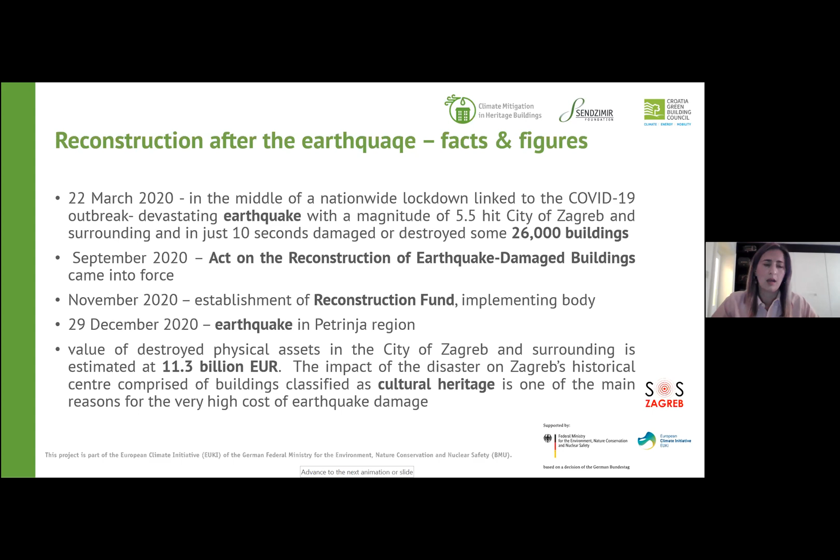Some facts and figures on the process: during this earthquake in Zagreb, about 26,000 buildings were damaged in these 10 seconds. Fresh data collected from the Reconstruction Fund report shows that until the end of August, the Ministry of Physical Planning, the main body, received almost 13,000 applications from citizens for reconstruction or removal of buildings, construction of replacement houses, monetary assistance, or exemptions of payment. Just 2% of these applications were transferred into decisions, which shows us there is a huge bottleneck in the Ministry of Physical Planning and Construction.

Out of these 26,000 damaged buildings, 25% were classified as unusable or temporarily unusable. This labeling is red. They received red and yellow marks, which means the owners are obliged to reconstruct their building. They belong to the Act on Reconstruction and should initiate the reconstruction process. What is very disappointing is that only 35% of owners have officially submitted an application form for reconstruction to the ministry.

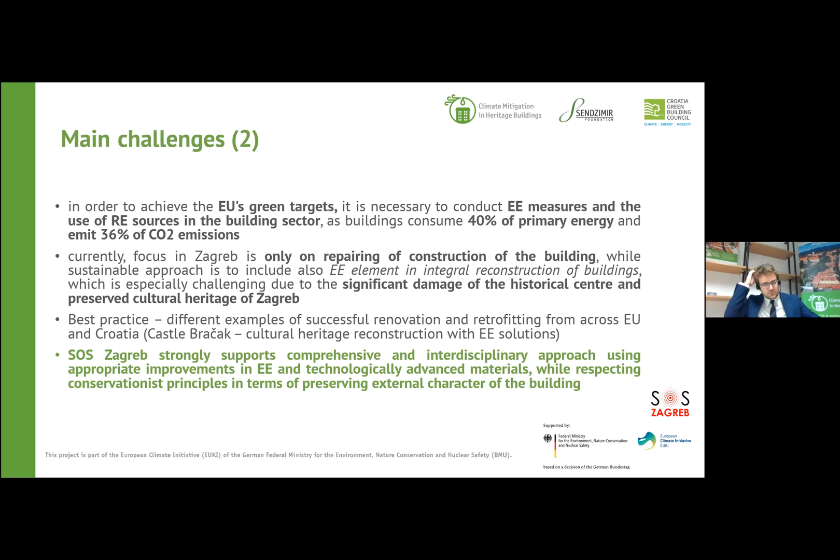Thank you, Ms. Bošnjak, for your very interesting presentation. You introduced us to the SOS Zagreb Association, showed us what your main goals and outcomes are, and thank you for outlining briefly what has happened in Zagreb and Croatia regarding the earthquakes in the last year and a half. As I see in the chat and Q&A, there are no questions at this point, so we will continue with our next presenter, and later on, if there are questions, we'll get back to Iva as well.

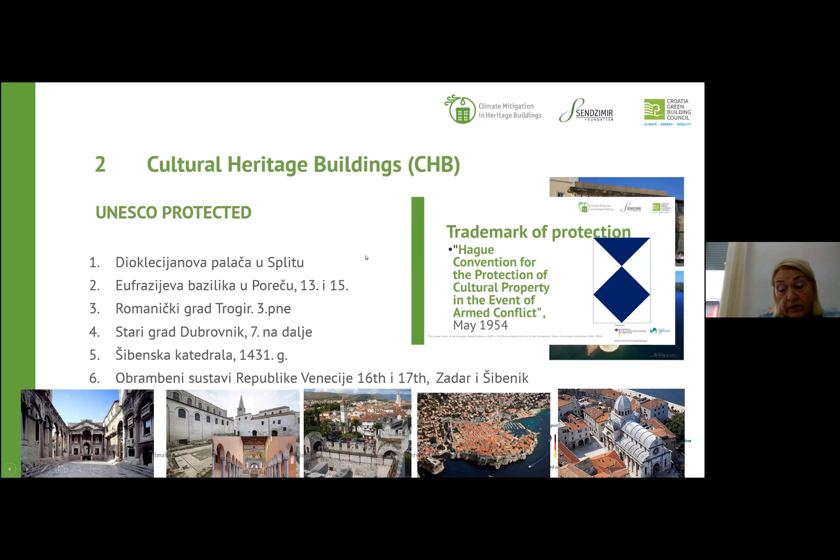Due to the Hague Convention for Protection of Cultural Property in the Event of Armed Conflict in 1954, we established a trademark for protection, but when we put it on our buildings in Croatia, it meant almost nothing during the homeland war in the 1990s, at the end of the last century.

All cultural heritage buildings are built from Neolithic to modern and contemporary art periods, and we can divide them into one which is traditional, built up to the middle of the last century and finished with classicism, and the modern, after that period, starting with the modern era. Neolithic area is antique and Roman area. They start from the islands in the Adriatic Sea.

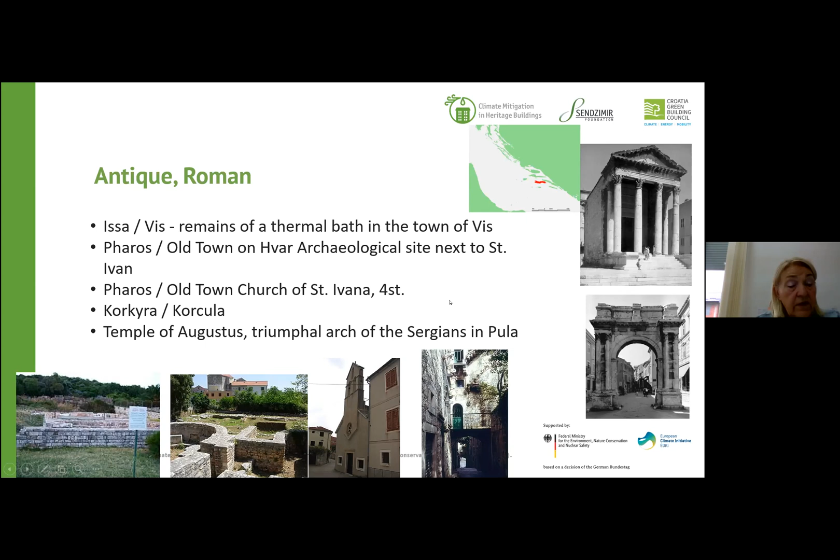On this, we have Hvar, we have Korčula, and others, which are very famous and attractive for tourism, but it is very difficult to preserve them all the time. In the Middle Ages, we have also famous buildings, most of them starting Croatian architecture in that time, and dozens of large churches and hundreds of smaller ones were built.

Then in the Renaissance, we have some churches under UNESCO protection, one in Trogir, and a very famous one in Zadar, the Cathedral of Sveta Stošija. And then we are going on to Šibenik Cathedral, to the Old Town of the Dubrovnik Republic, excuse me.

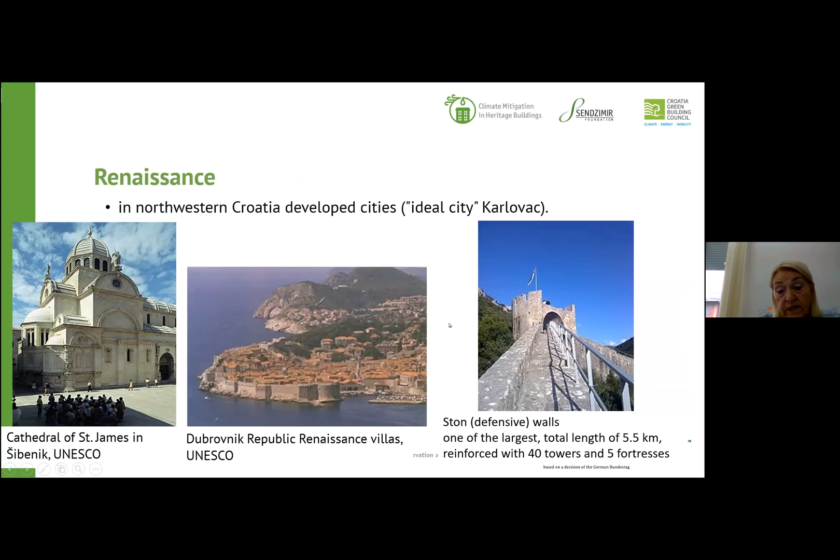And the Ston walls in Ston, which are after China's wall, the second largest one in the world.

From the Neolithic to Moderna in the Gothic period, we have the famous cathedral in Zagreb. It was damaged twice, once in the earthquake of 1880, then in 1906, and now in 2020 it was badly damaged.

From Baroque and Rococo, we have the cathedral in Đakovo, the cathedral in Rijeka, the Baroque church St. Vlaho in Dubrovnik. Then we have the very famous St. Mary Magdalene in Sela, near Sisak. It was badly damaged in this earthquake, the Petrinja earthquake, and it was damaged before in the Homeland War. We repaired it and now it's damaged again.

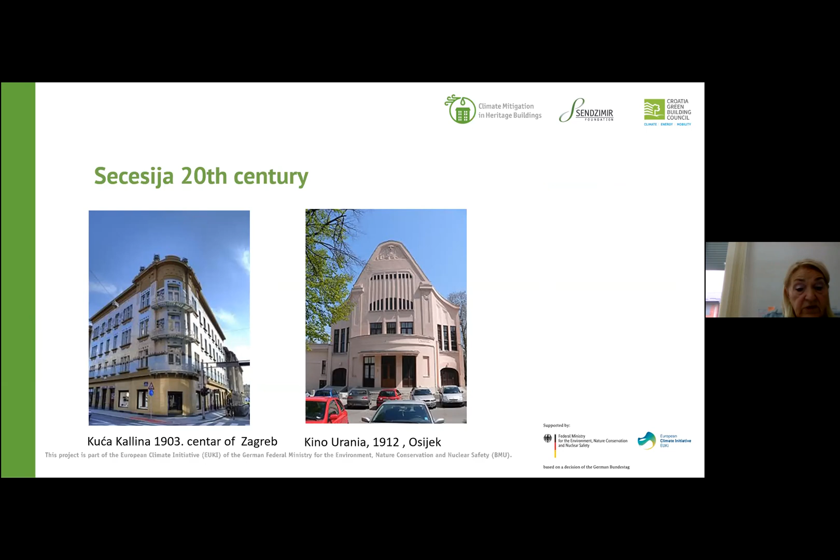For classicism and historicism, we have the Croatian National Theatre, the Academy building in Zagreb, Mirogoj Cemetery, very famous with its arcades, Secesija from the 20th century in Zagreb and Osijek, Moderna in Zagreb, the very famous Croatian fine arts house known as Mestrović Pavilion. It was built in the middle of last century, and the Burza Palace in Zagreb some years earlier.

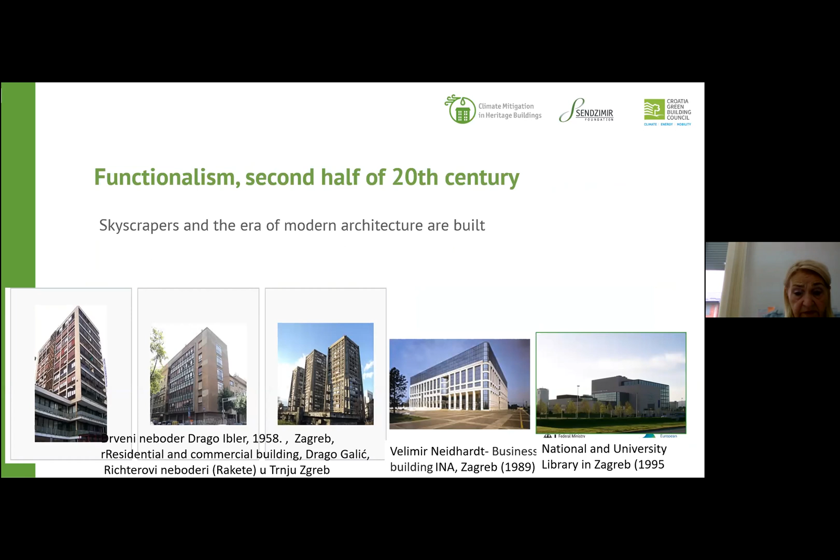Then functionalism in the second half of the century. We have several very famous buildings. As I mentioned before, we have traditional and modern buildings. For our presentation, this one from the traditional period is much more important. This is the different architecture periods, construction and materials, and all are built before 1964, which is the year when we established the first construction regulation in this region in Croatia, in connection with the former Yugoslavia state.

These traditional heritage buildings, as a whole, have different vertical and horizontal resistance, sufficient almost always vertically, but not enough, and very low horizontal resistance for seismic action. We have to know that according to our current regulation connected with Eurocodes, this building has about 4 times less horizontal resistance, and for that reason it is very dangerous, and their behavior and damages in an earthquake are very heavy and important for the building as a whole.

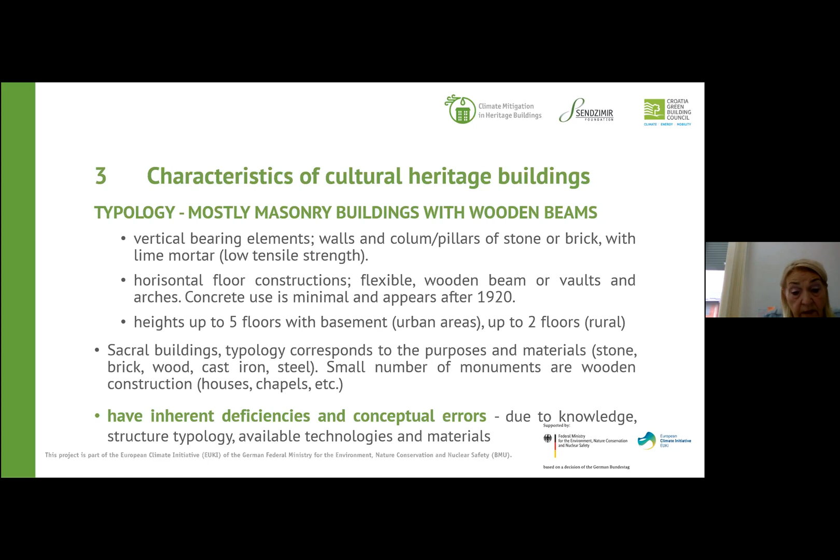All these characteristics lead us to find a large number of inherent deficiencies and conceptual errors in this building. These are connected with low knowledge of the structural typology of that time, of available technologies, and of the materials we use for this structure. Inherent deficiencies are very different.

Inadequate roof construction, poor connections of wooden beams and walls, harmful staircase construction, especially when there is a cantilever style, and deficiency of the foundation and the soil as well.

But over time, acquired deficiencies happened because of old and poor maintenance of the structure of the building, uncontrolled reconstruction connected with walls and floors, upgrades, previous actions, which are sometimes very heavy, especially if an earthquake or fire occurred affecting the building. Then the influence of the atmosphere, of moisture, and undermining of the foundation. This is all very important for understanding and predicting how a building will behave after an earthquake happens.

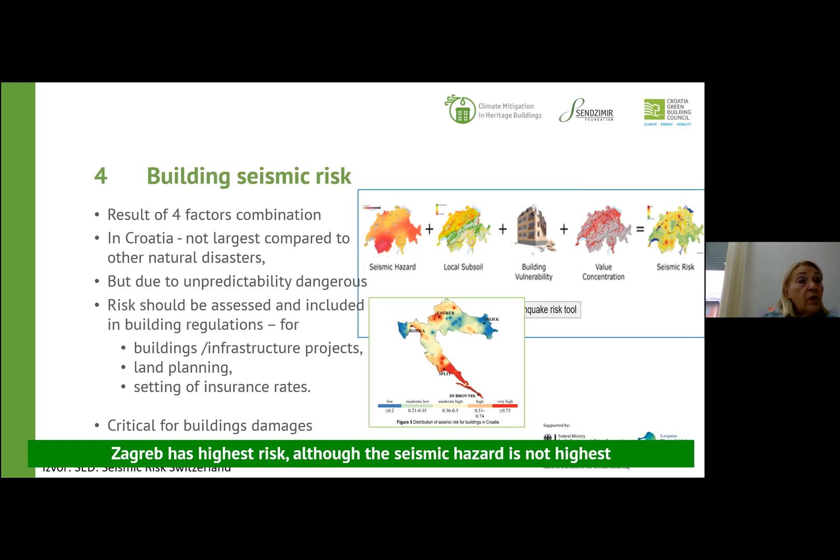Let us give some information about each of these components. Seismic hazard gives us information that the earthquake will occur in a certain area within a certain period and at a certain strength, but we don't know when, and this is the main problem.

We have in Europe the same reason why earthquakes occur. It is a mutual convergence happening between the African plate and the European plate, and particularly in our country, the Adriatic plate.

We have, for the purpose of calculation and for designing new buildings and reconstructing old ones, a seismic hazard map which gives peak ground acceleration information, probability of when it will occur, and a return period of 475 years. This comes from Eurocode 8.

At the same time, this is information for calculating the seismic action and for the response spectrum.

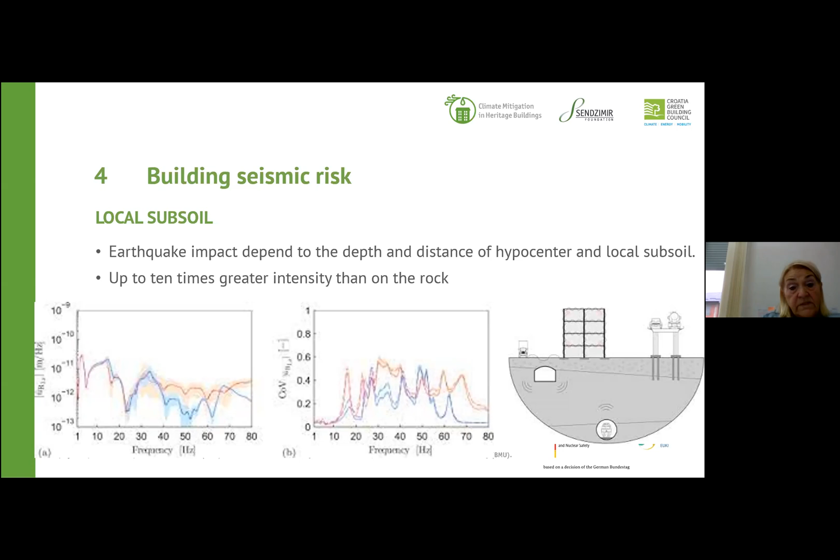Local subsoil is very important because earthquake impact depends on the depth and distance of the hypocenter, as well as on local subsoil. We can have up to 10 times greater intensity on some soil compared with rock. That means buildings have the best behavior if they are built on rock.

Now, something about building vulnerability. All cultural heritage buildings up to the middle of the last century are masonry without reinforced concrete elements, and on those buildings there is a strong influence of damage after an earthquake occurs.

They are highly sensitive to seismic effects, and according to the EMS scale, for that building the vulnerability class is B. This scale goes from A to F, and A is the most vulnerable. That means this class is very close to the highest vulnerability.

Building seismic risk in Croatia, as elsewhere, is connected with the year of construction and the type of construction, and they go almost together. Regarding year of construction, we have information that about 45% of buildings are built up to 1980, meaning without any design for seismic resistance.

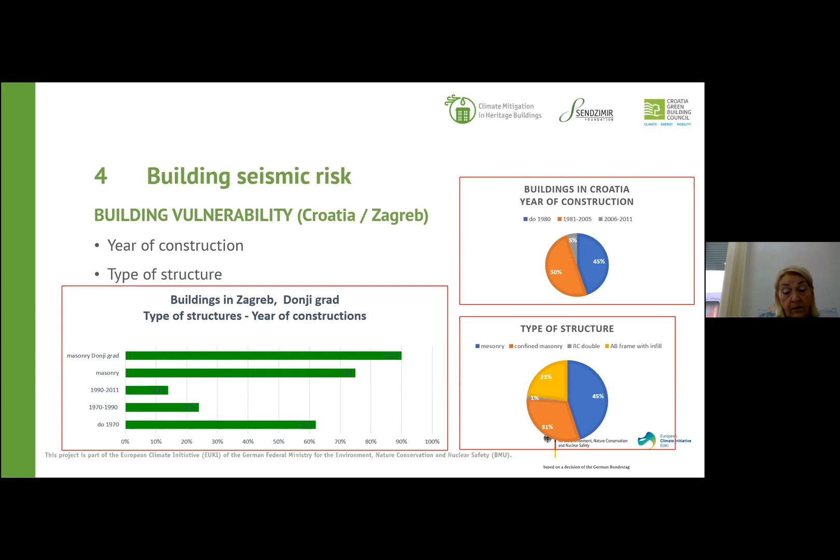Damage on cultural heritage buildings varies greatly. It depends, of course, on the seismic risk of the building. If the seismic risk is low, we will not have any damage, and conversely, if it is high, we will have larger damage to the building.

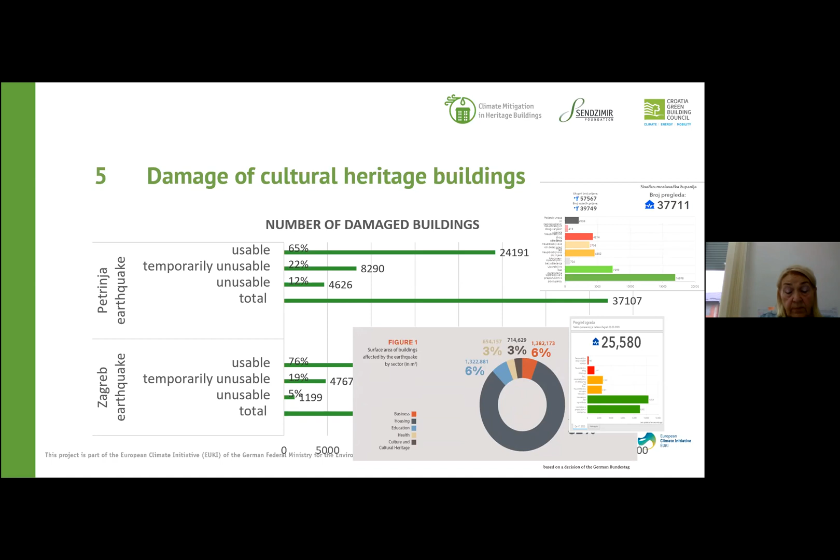When we look at Zagreb, how many buildings under cultural protection were damaged, that was about 3% of all damaged buildings in Zagreb.

Here are two graphs of damage to all buildings, on the left side we have the Zagreb area. You can see how many usable, temporary usable, unusable, and total buildings are assessed. This is the information for Donji Grad, and this is the information for Petrinja.

On the right side you have damage on cultural heritage buildings. In Zagreb, in Zona A, this is about the Donji Grad area, and Zona B is the area of Upper Town, Gornji Grad, and Medveščak. Here you can see individual buildings in Petrinja and the cultural historic whole in Petrinja. Much more buildings were strongly damaged in Petrinja regarding cultural heritage buildings.

Here is information that during the Homeland War, we have about 2,400 cultural monuments destroyed or heavily damaged or with low damage.

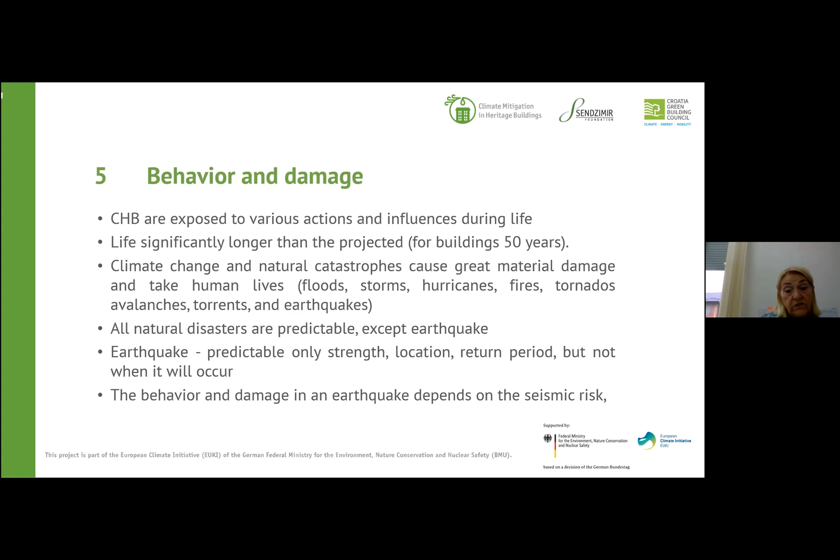The behavior and damages in an earthquake strongly depend on seismic risk. So we have to take care of all the categories which make the seismic risk higher or less important. Damage in all earthquakes, we can see the same pattern in this one.

Influence on chimneys, roof cover, gable walls, or superstructures. They cause a lot of cracks in the connections with walls and horizontal floor structures. They have influence on the bearing walls and others.

They have influence on parapet walls, lintels, around openings. A lot of cracks happen, and on ceiling structures they are falling down. These are not damages on construction, just ceiling damages.

Also we have lots of damage on staircases, especially we found this situation in large buildings like palaces in the Donji Grad in Zagreb.

Then in partition walls, which take a lot of seismic actions during the event and save the bearing walls, that was luck for this situation of behavior and damages.

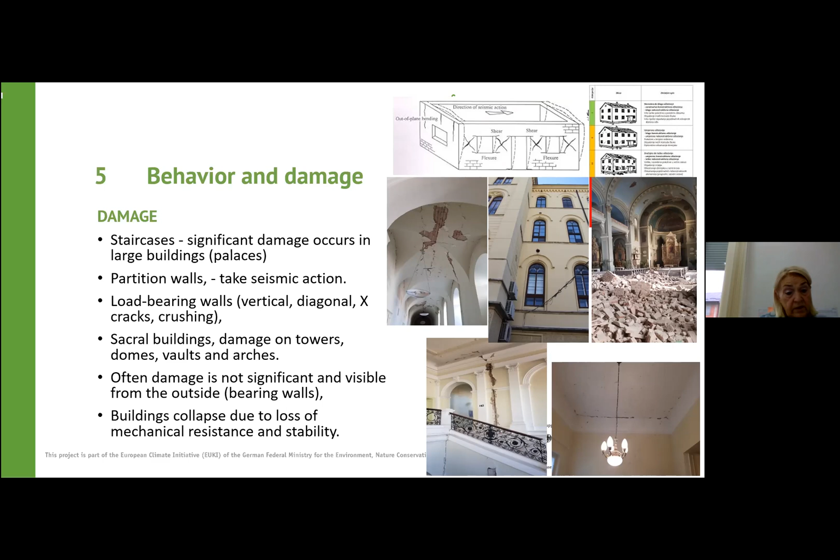But in Zagreb, that was mainly family buildings, small buildings close to the epicenter of the earthquake, and in Petrinja's earthquake that was others too.

What comes after an earthquake happens? We have the phase for repair, renovation, or reconstruction, and generally it goes in three terms: short term, then medium and long term. In the first term we have urgent removal of all damaged elements, such as chimneys, architectural ornaments, and others. This is for protection of the people and the structure after the earthquake.

We also have protection and evacuation of movable cultural goods. In the medium term, this includes recovery, conservation, and restoration, and the long term includes complete recovery to decrease vulnerability of the structure, as well as the architectural and historical value.

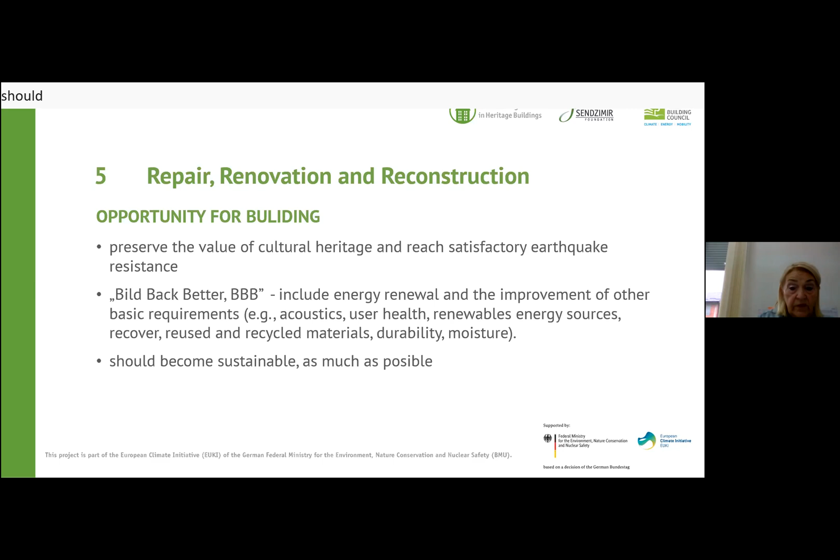In repairing, renovation, and reconstruction, we have a different approach when we talk about an individual single protected building. Then we need to have a conservation study of conditions. We have the document which is the base for all other protection and strengthening.

For the cultural historical whole, we have an easier way of protection, renovation, and reconstruction, according to guidelines which are part of the program of measures adopted in the Reconstruction Act. It may seem that it is not easy to use, but the main reason for that is to make it easier and quicker.

Generally, all cultural heritage buildings, like other buildings, have to be repaired or reconstructed. But for cultural heritage buildings, we can rebuild them as a facsimile, which is not so famous, but sometimes and in some situations it is the only possible way of reparation and reconstruction.

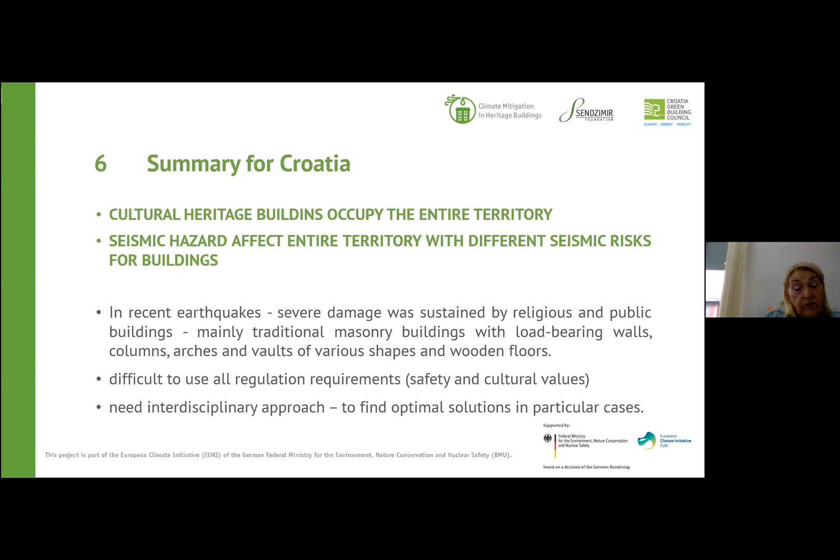Summary for Croatia: cultural heritage buildings all have low earthquake resistance. They are vulnerable, and seismic risk for individual protected cultural property should be determined before an earthquake happens, as well as conservation and restoration requirements.

A strategy should be adopted to strengthen all buildings which are not damaged in earthquakes until now, because we don't want to lose them in a new earthquake.

We have to have in mind that seismic activity is growing as a result of climate change. Additional specialist knowledge is needed, and an interdisciplinary approach to manage all this.

We need to have informal education for all potential experts of various specialties for repairing and reconstruction of damaged buildings after earthquakes. It's important to improve seismic resistance on currently undamaged buildings too.

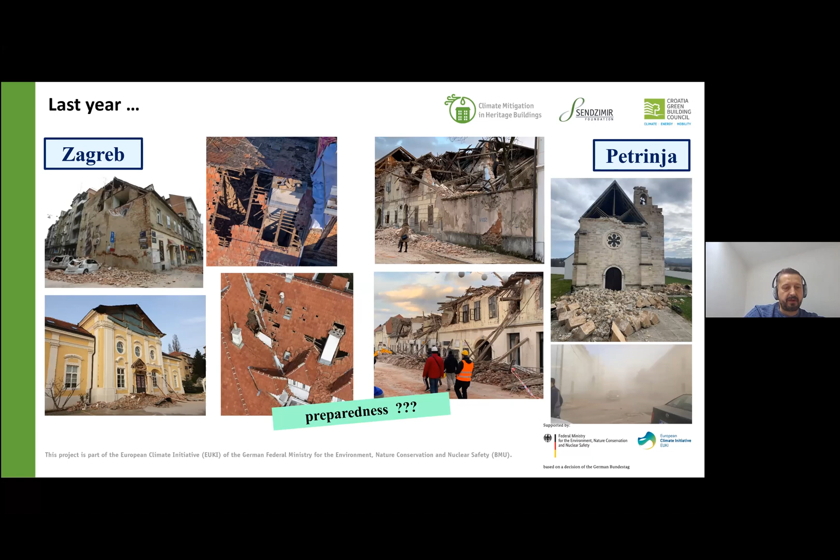But we should know it, because all available data collected in these years are screaming that earthquake is an unacceptable risk for Croatia. Very interesting, because we did 2 national risk assessments with scenario of Zagreb, 2015 and 2018. You can see some results that clearly said that the historical center of Zagreb is endangered, and logically all other historical centers in Croatia.

It is in our mindset to build houses to last forever. We have a very, very aged building stock, like Mihaela previously said, mostly in no code or low code. You can see some data on the slide. Additionally, Croatia is very, very specific with poor maintenance. Most of the region has also massive illegal construction and undocumented reconstruction, like you can see, one of these is on this slide. And in general, seismic risk awareness in Croatia was a serious problem.

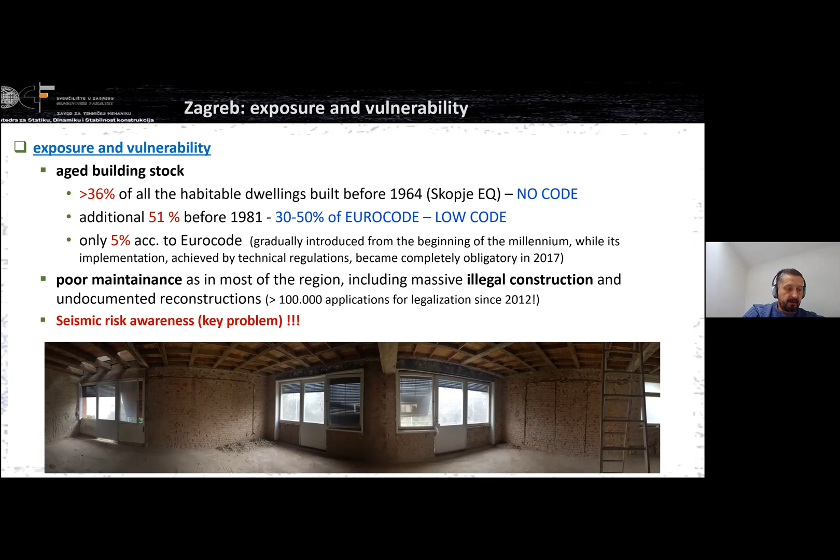I have to highlight that in the reconstruction process in historic city centers, we can expect great discrepancy between what we have on plans, available documentation, or what we find in the real situation. This is related to this illegal construction.

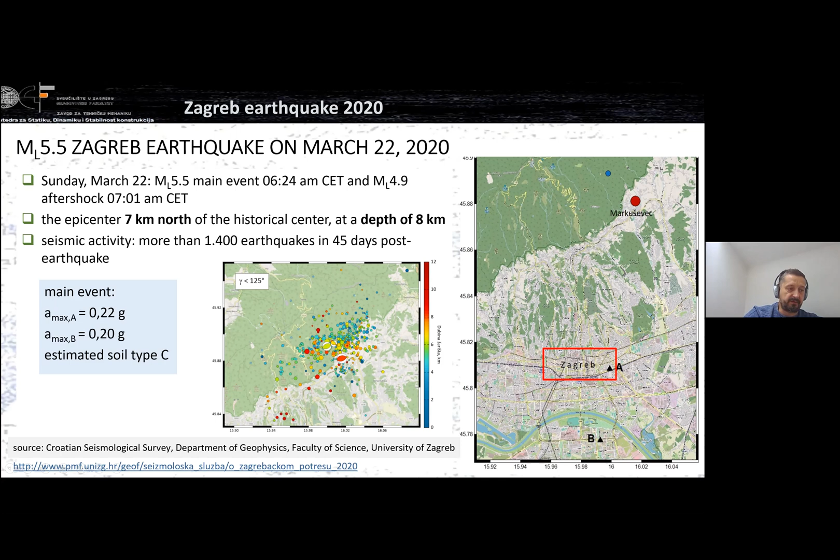And in this situation, Zagreb was struck by a big earthquake. All data you already heard, but I have to mention that the epicenter is really, really close to the city center, what is generally rare. Also, I have to mention that we were very, very lucky, because the day before the earthquake, lockdown was proclaimed, and many people left the city.

And what is strange is that financial losses are far exceeding expectations for an event of that size. I have to mention that we are expecting around 6.5 on the Richter scale, and I don't want to even think about what would happen with an event of that size. Some of the famous pictures, like you saw before, this Zagreb Cathedral.

Many churches are severely damaged. Also hospitals, because most of them are built in the period of the big Zagreb earthquake, 1880. Also many universities are damaged because they are also very, very old. We have a very long tradition from university.

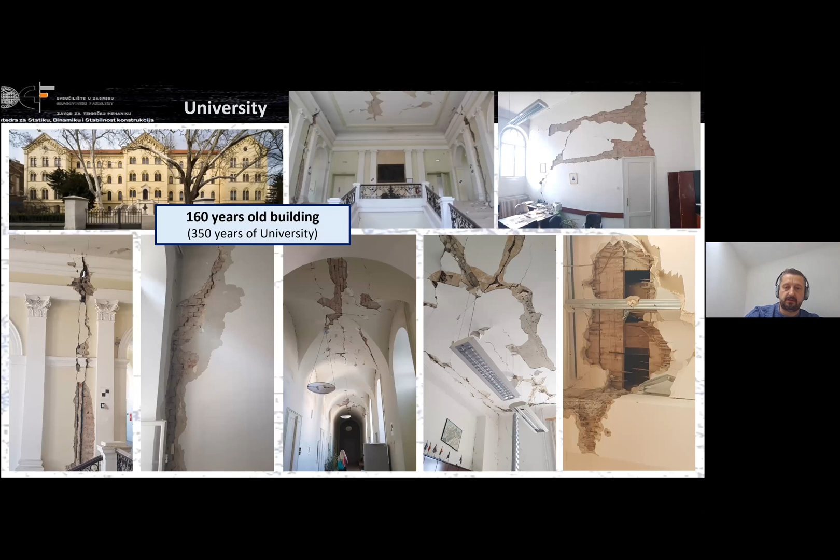The reconstruction of this kind of building usually lasts very, very long in normal times. But nowadays we are trying to push them to reconstruct very quickly by some urgent measures, because we have some funds from the Solidarity Fund.

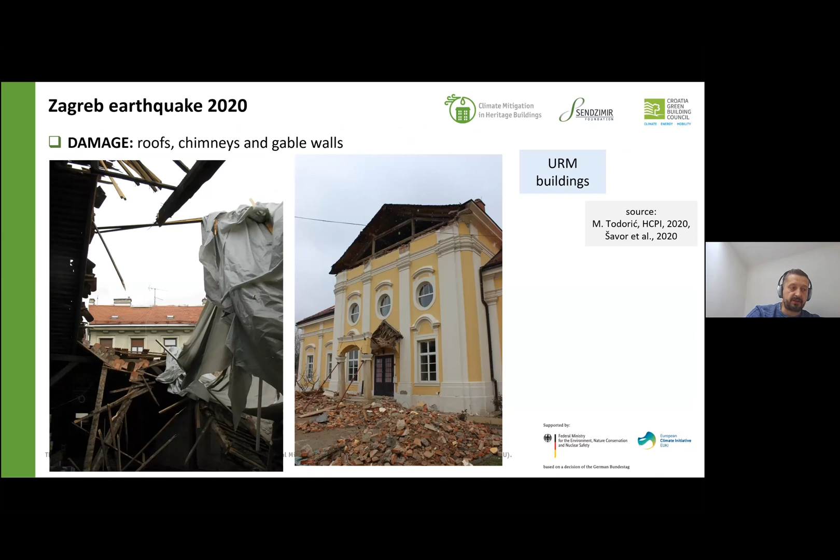In the historical part of the city, this is a usual damage, like Mihaela said: roof, chimneys, and gable walls. We have a serious problem with the wall detaching from the structure and losing stability out of the plane. We are talking here mostly about unreinforced masonry buildings, URM as usually said, and there are some specific problems we have in the historical part of the town.

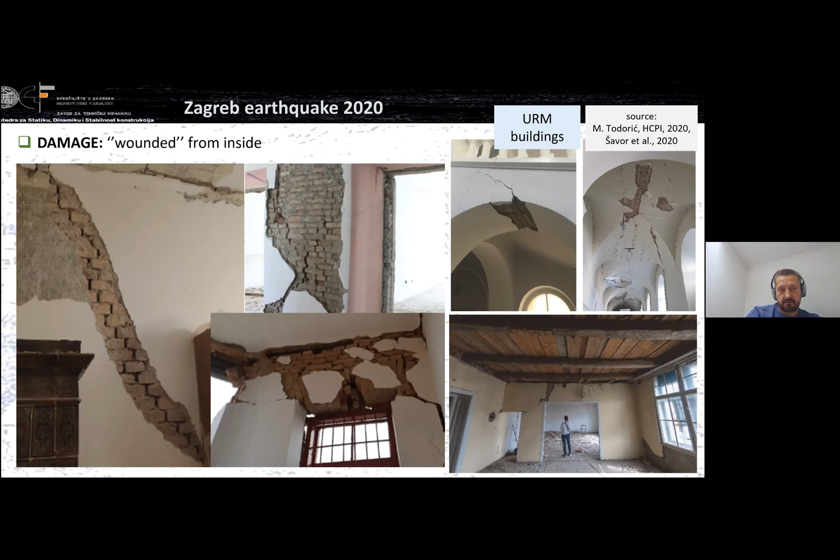Most of the buildings are wounded from inside, and if you walk in Zagreb today, through Zagreb streets, you couldn't see any damage from outside. Maybe some on upper floors, some parts hanging out, but most of the buildings, like I said, are wounded from inside.

Also on the outside of the city, near the epicenter, we had damage to houses. These are mostly illegally made houses.

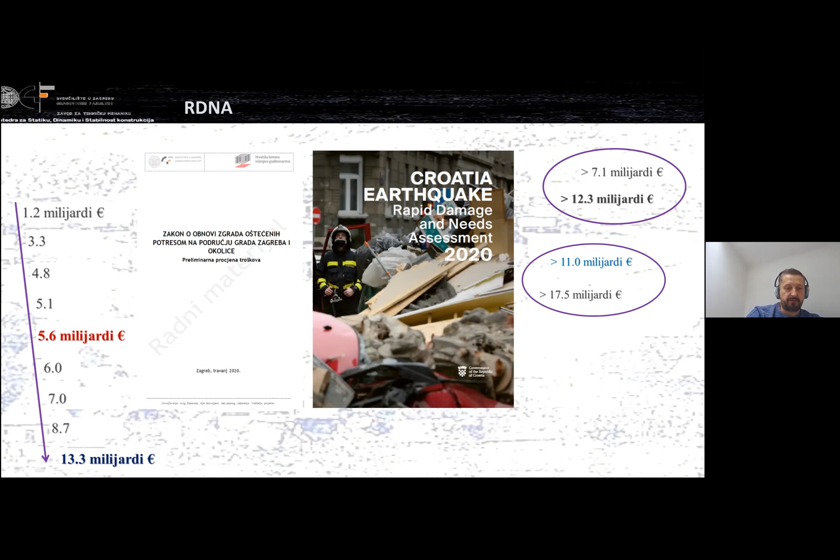In general, like mentioned before, the assessment of reconstruction cost made by our ministry or World Bank - sorry, it's in Croatian - but we are talking about billions of euros. There are some more precise results related to this: cultural heritage hits 1.4 of the general sum. You can see it's a large part of the general sum related to culture and cultural heritage.

We have to mention that only 3% of damaged area is related to cultural heritage, and this shows even more how high our costs are, or investments needed, for the reconstruction of our cultural heritage in Zagreb.

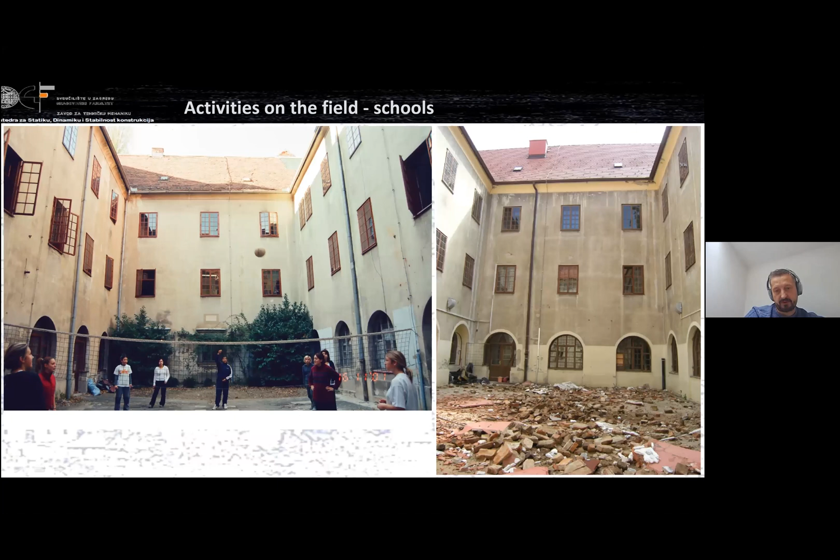Now there's a big discussion about what to do: reconstruct it or move out the school. You can see some plans of that school and photos before and after the earthquake.

Now the building is prepared for reconstruction, and a designer's structural analysis was made to create an invasive reconstruction solution with many reinforced concrete elements, with rigid diaphragms, all storeys.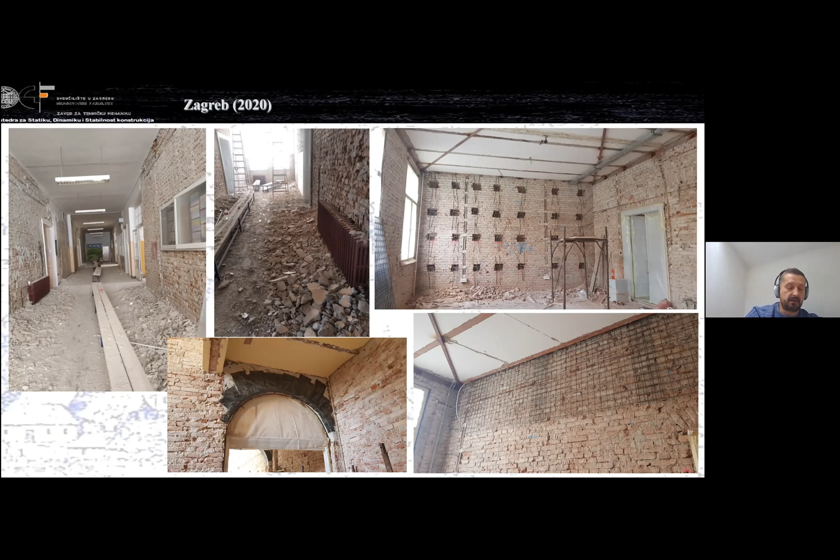This kind of reconstruction caused many parents of the pupils to ask questions about the safety of their children. I raised the question about cultural heritage protection related to schools, maybe hospitals, which are more endangered, and the usability of that building, which is nowadays a huge question in Croatia.

In general, this is data from over 26,000 damage assessments we made in Zagreb. These are some of the results, and the last table shows that over 70% of damaged buildings, usable, unusable, and temporarily unusable, were located in only 4 historical city parts.

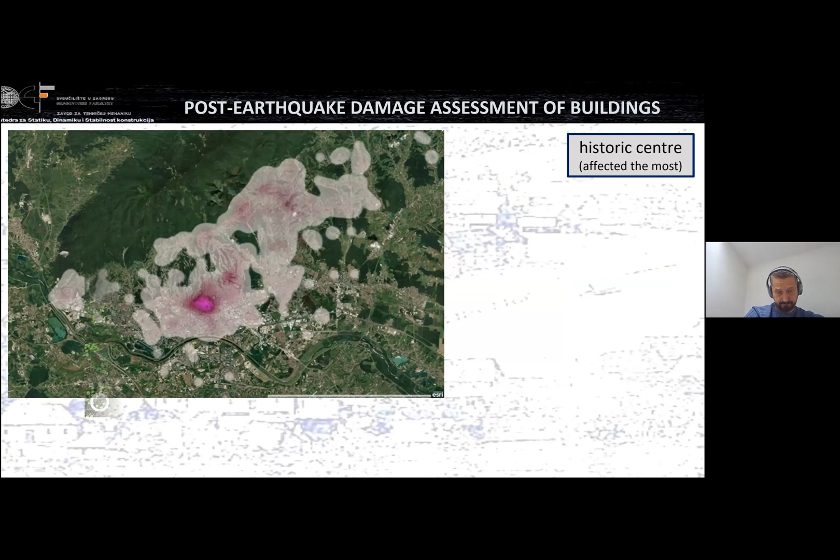We have 17 in total, and this is almost entirely related to the historical center. You can see it here on heat maps of the city. Up here is the epicenter, and this is the old city.

All these results proved the seismic risk analysis I showed at the beginning of my presentation. There's also a map showing protected zones A and B, ambientally protected zones, with the same marks inside: red, yellow, and green.

You can see this city center is really devastated. I have to mention that our old part of the city is arranged in city blocks, or building aggregates, which creates another big problem for us.

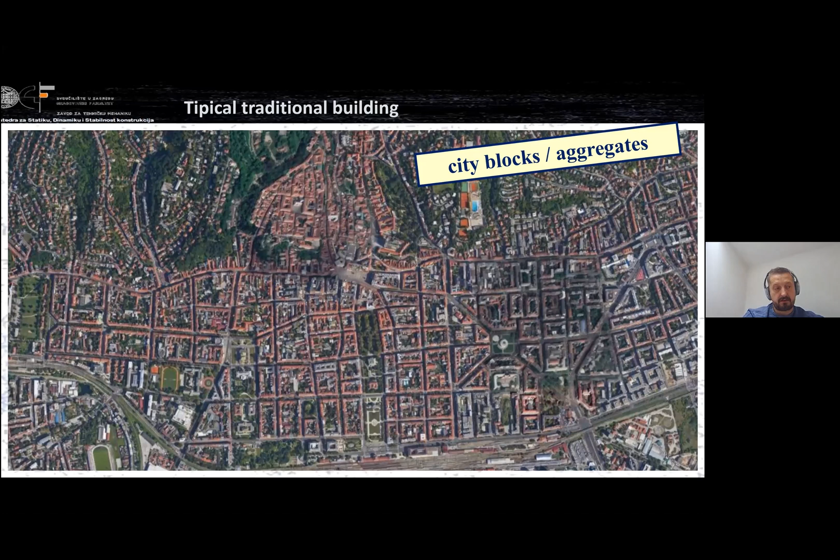We have one huge project about urban renovation, where we gathered over 200 experts from 12 faculties of our university to provide solutions for reconstruction. This is in some sense a pilot project, and there's huge discussion with all these different approaches about how to solve one of the blocks.

It's very hard to reconcile these different perspectives of different experts. We encountered many ownership problems and unrecorded reconstructions, etc. Inside that process, we have colleagues dealing with energy efficiency, green infrastructure, and climate change.

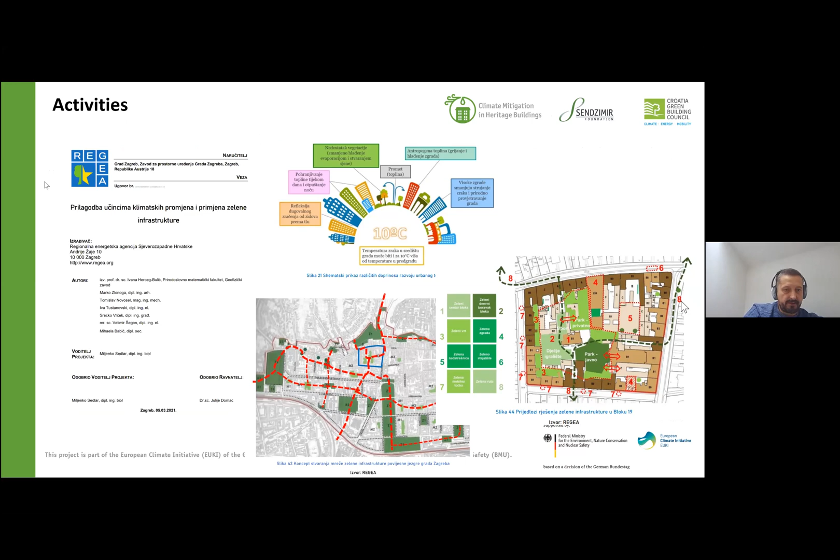This is one of the 12 studies in this Block 19 large study. You can see Block 19 here from the Google perspective, and I have to say this is one of the foundations of the reconstruction process in Zagreb. We try to put all our knowledge inside it and build back better, as a kind of pilot study for all other city blocks in Zagreb.

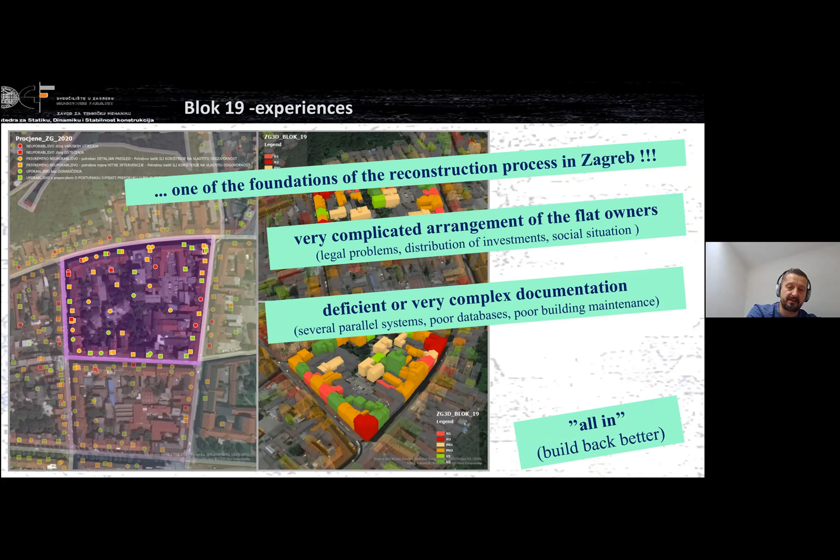I have to mention 2 serious problems: a very complicated arrangement of flat owners, legal distribution of investments, social situation, and very deficient or complex documentation with several parallel systems, poor database, and poor building maintenance. That's one of the problems.

Here is an extract from the proposition of some reconstruction process. It's in Croatian, but I will describe it. We propose 10 different approaches.

The simple one, with intervention only in upper floors, is not really structurally recommended, but it's a simple solution without moving people out. There are several other approaches using old techniques to strengthen the walls, new techniques, old ones, and all of them assume having a rigid or semi-rigid diaphragm on the floors.

The final solution is building replacement. This is proposed to designers and citizens so they can choose and get a perspective on what they can do with their buildings. As I mentioned before, these building aggregates are very complex for structural design, especially regarding the interaction between the buildings.

Results of damage assessment after the earthquake show that buildings are helping each other, and most of the neighboring buildings are different heights. You can see here on this perspective, and that's some of the problems we are dealing with.

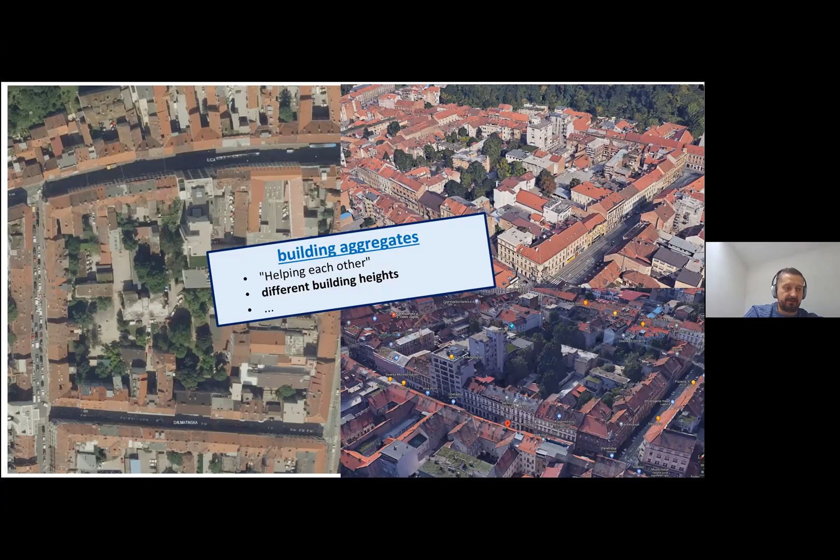I can show one idea to take advantage of these walls in the row and try to reconstruct, or try to synchronize the reconstruction process to do it at the same time as much as can be, and also to use all other elements like stair core or some annexes, upgrades to fix, to make this city block stable in general.

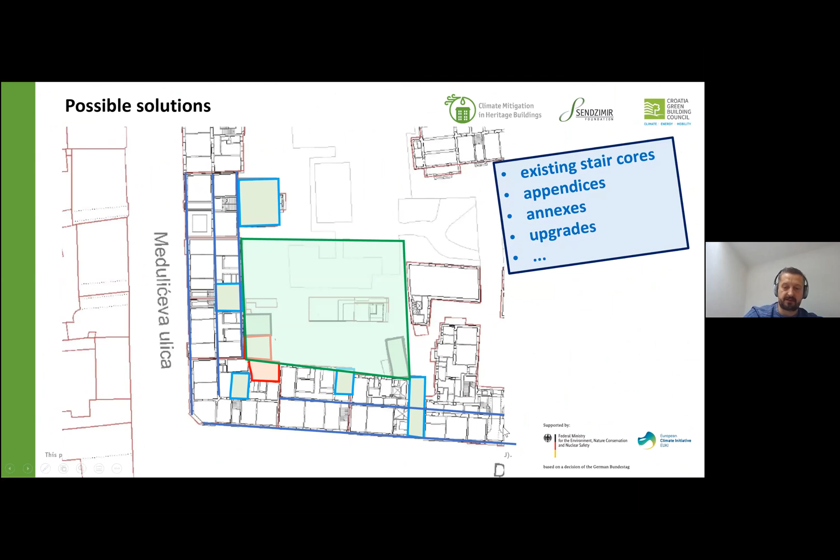Okay, this is one typical building. It's unreinforced masonry, relatively high, 4, sometimes 6 stories, over 20 meters. This was made in this analysis.

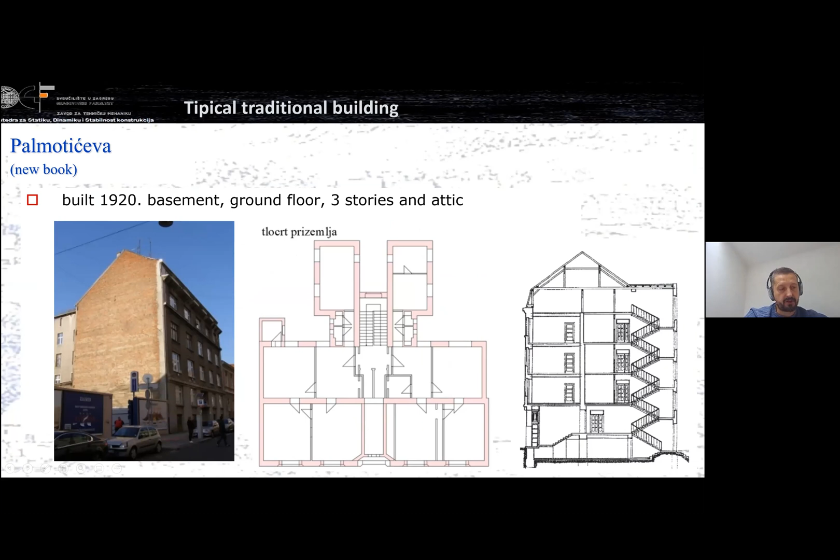In this global analysis, this specific building was made inside the new book presented for our designers. You can see we have facade wall and only one centrally placed wall between, there are supports of wooden beams. Gable walls are usually poorly connected without that weight pressure, and that caused instability.

A second issue is how to strengthen the wall. Calculations show that all traditional buildings are between 20 and 40% of what we can expect to meet our standards, now standards enforced by Eurocode. And many solutions are on the table.

Many new fiber materials, traditional reinforced concrete strengthening is on the table, including insertion of new walls, tie rods, connections, and so on. And this is the big discussion between structural engineers and inside our chamber.

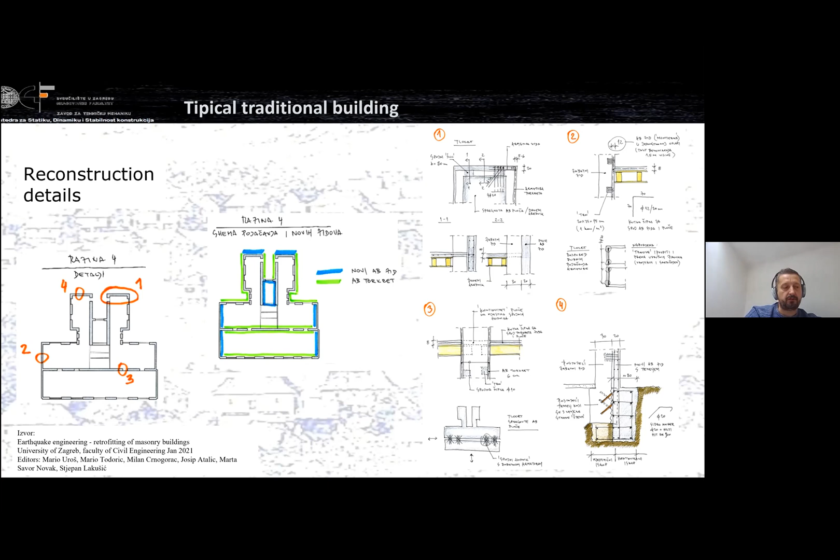I have to mention that one of the serious problems is that non-linear calculations like pushover are not something our engineers are used to, and we had to make some extra effort to raise the level of knowledge before this reconstruction process.

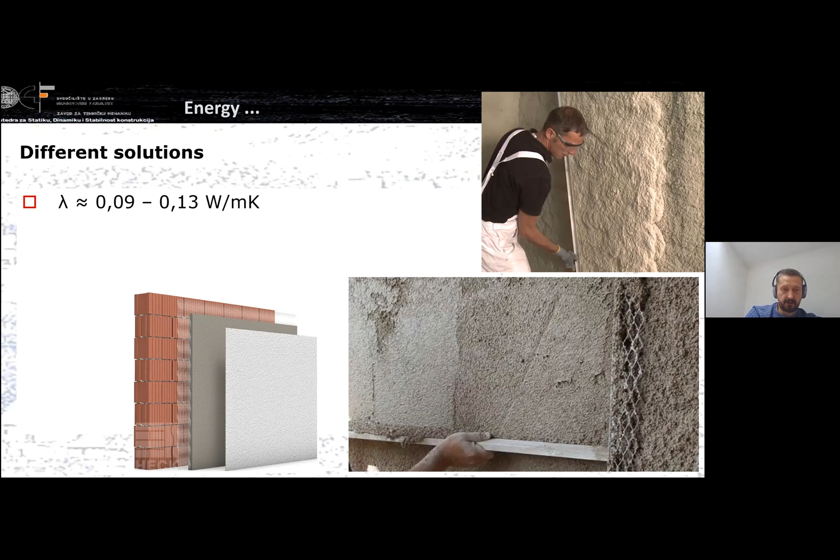I showed this example because in this book all different approaches to the reconstruction process and to the design were mentioned. Also, many solutions related to energy efficiency were proposed, and presented to all the structural engineers and citizens involved in that reconstruction process, to have on the table all possible solutions and choose one.

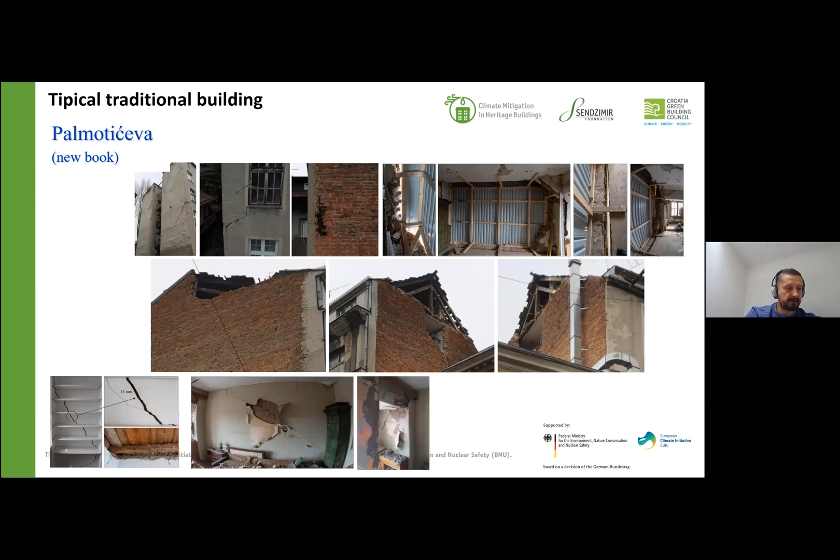These present some of the typical damage of traditional houses in the historical city block. Okay, today, mostly on the field, we can see reconstruction process of gable walls, chimneys, and roofs. This is the main job site today.

These are some of the solutions for walls and chimneys, usually only made on top floors, because, like I said before, people don't want to move out. You can see some pictures from the field. They are mostly made of reinforced concrete or wooden floor to connect these walls on the upper floor.

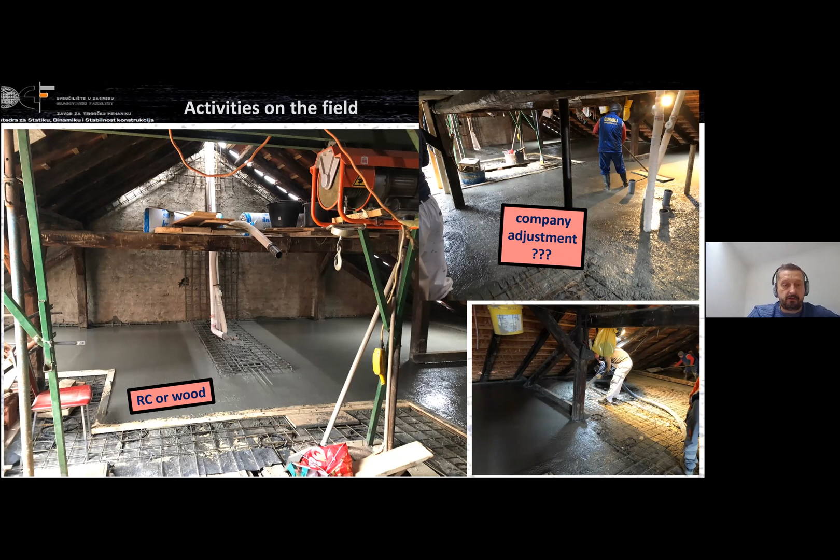Many other firms, many companies in Croatia are trying to adjust these new jobs on job sites and try to implement new techniques, especially copying from Italy, which has large experience from this reconstruction process.

In that sense, a group of 23 experts made a manual for these urgent measures just a few months after the earthquakes, containing several solutions for each specific problem of gable, chimney, or roof that I mentioned before.

We also made a strong campaign of raising the level of knowledge, which was greatly needed, and we at the faculty felt a great duty to that. Every 22nd of the month, we organize seminars, webinars, education, connecting practitioners and university guests from abroad.

And on the 1 year anniversary of the earthquake, we held a large conference, the Croatian Conference on Earthquake Engineering, to summarize all this knowledge and try to present it to all our practitioners on the field.

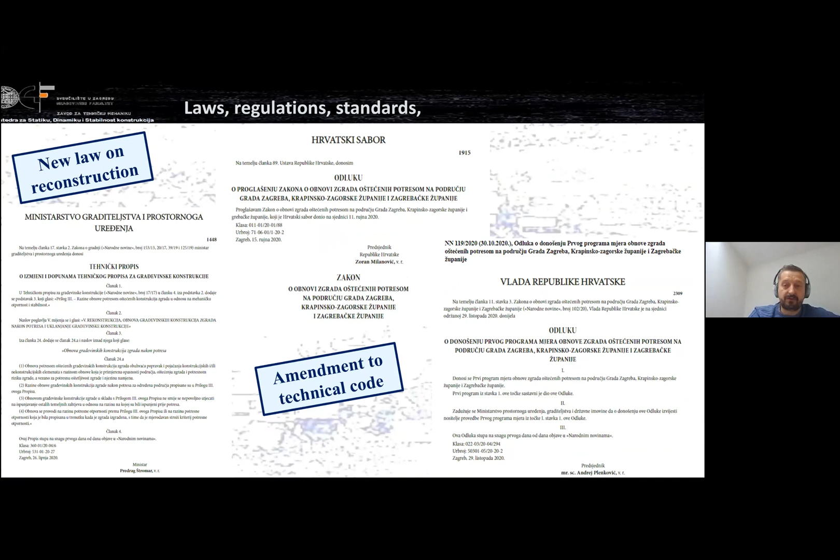Like my colleague Mihaela said, after every catastrophe we have new laws, new amendments of technical code, many new things, and that's what we have to make extra effort to adapt to some procedures. Nowadays we are changing the law again, and I'm hoping that this reconstruction process will be much faster.

And in all that process, we didn't need another earthquake in Petrinja. It was 6.2 magnitude with a pre-shock of 5.0 magnitude.

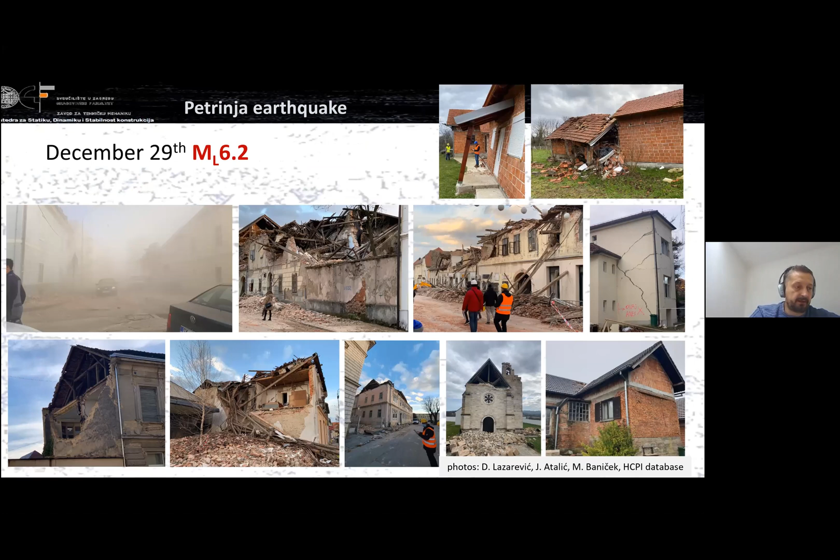This assessment process after Zagreb greatly helped in organizing this large catastrophe, but we didn't have time to completely use that experience and knowledge to build a system for fighting future earthquakes.

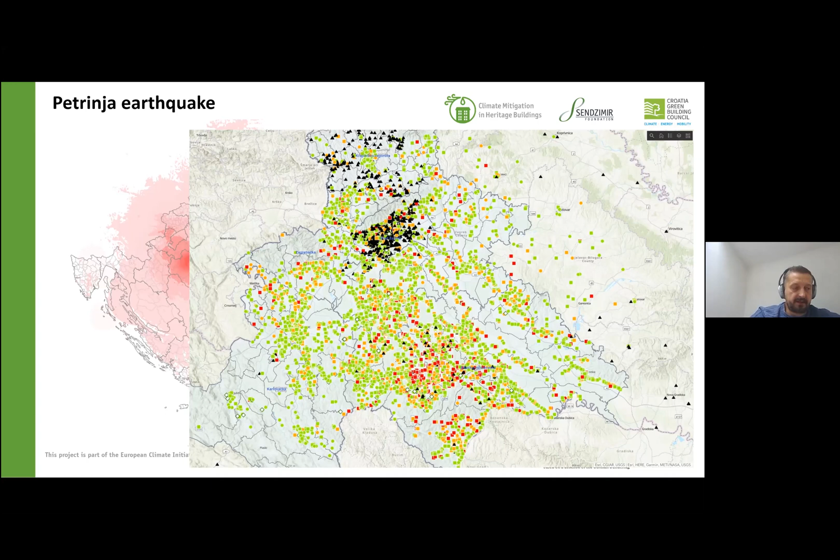Some statistical data related to cultural heritage: this earthquake also greatly affected cultural heritage - immovable cultural properties, listed cultural-historical areas, houses, museums, facilities, and libraries. Most of them are really seriously damaged.

Also, the PDNA report from the Petrinja earthquake showed that the cultural heritage impact is also very great.

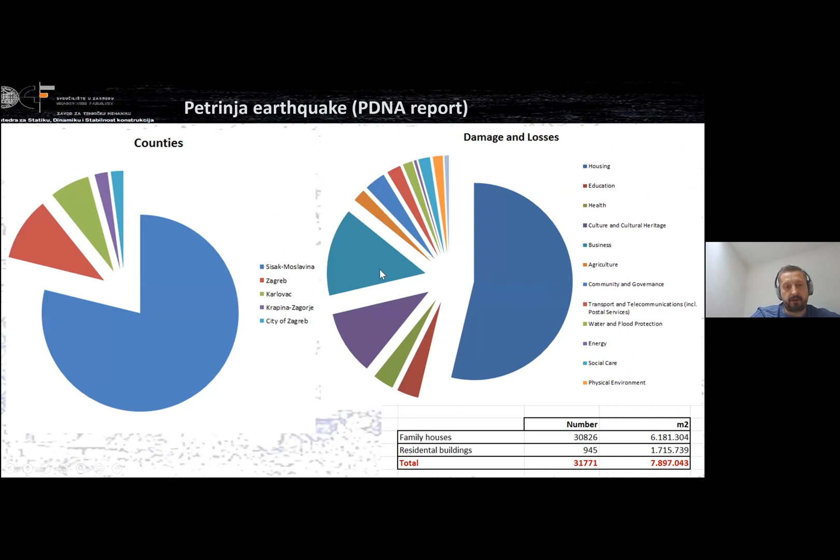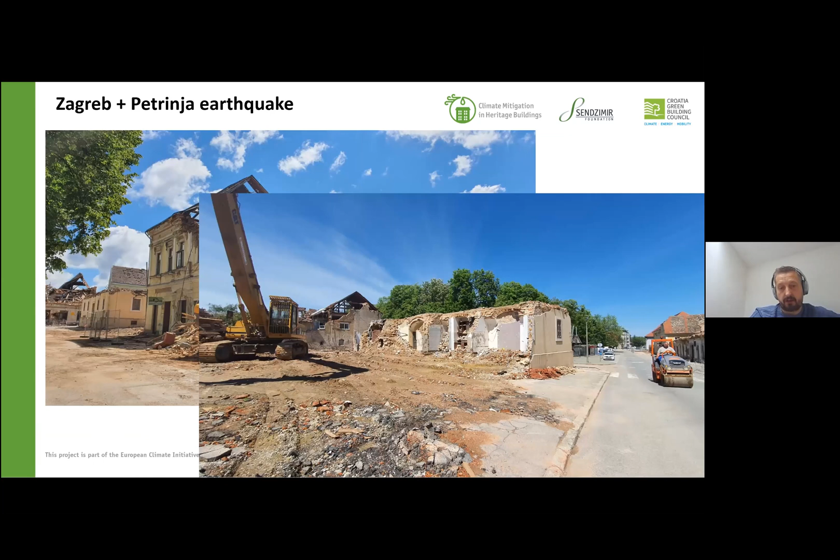Nowadays there are some pictures - the seriously damaged buildings are being demolished now, or were a few months before. Most activities relate to demolishing buildings, and you can see on several slides, very sad slides, what happened to cultural heritage buildings in Petrinja, in Petrinja center. They are all recorded, and I hope they will be rebuilt better.

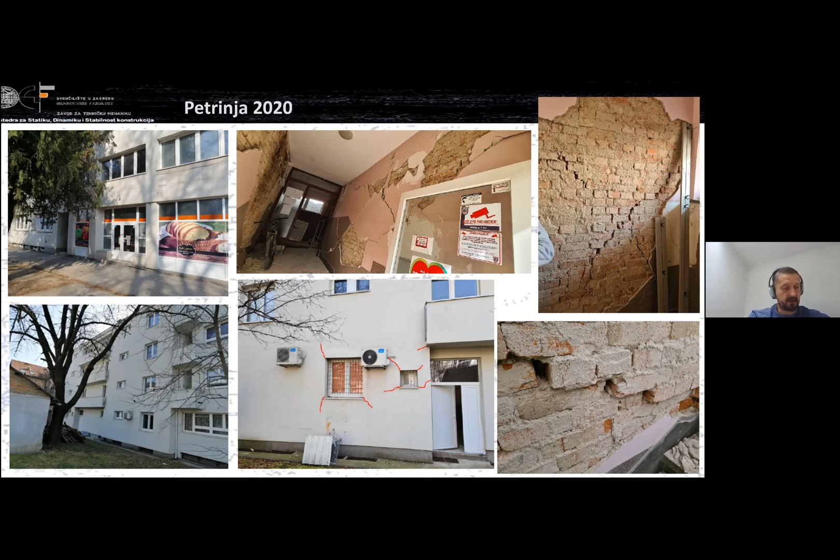To conclude, in Croatia we have many sins from the past, like poor databases, poor seismic risk awareness, poor preparedness, and education that is not adjusted to this specific problem of traditional buildings.

Presently we are dealing with preliminary analysis, trying to spend funds from the Solidarity Fund, still dealing with emergency measures, and trying to gather all the capacities we have in Croatia.

We're also trying to raise the level of knowledge to be prepared for the long reconstruction process we are expecting. In the future, we are trying to implement a seismic certificate and improve the building maintenance process, which was almost abandoned, and to create a long-term strategy.

In these three points, we are hoping to make some effort. Nowadays we are trying to raise seismic risk awareness so people can prepare for this reconstruction process, which includes building maintenance and a long-term strategy for all of Croatia, not just Zagreb and Petrinja.

I'll give a brief overview of the impact of the earthquakes in Zagreb and Petrinja on cultural heritage. The second part will be the post-earthquake response of the Conservation Service and the Ministry of Culture, and the third part will be the conservation approach to the renewal of the historic core of Petrinja.

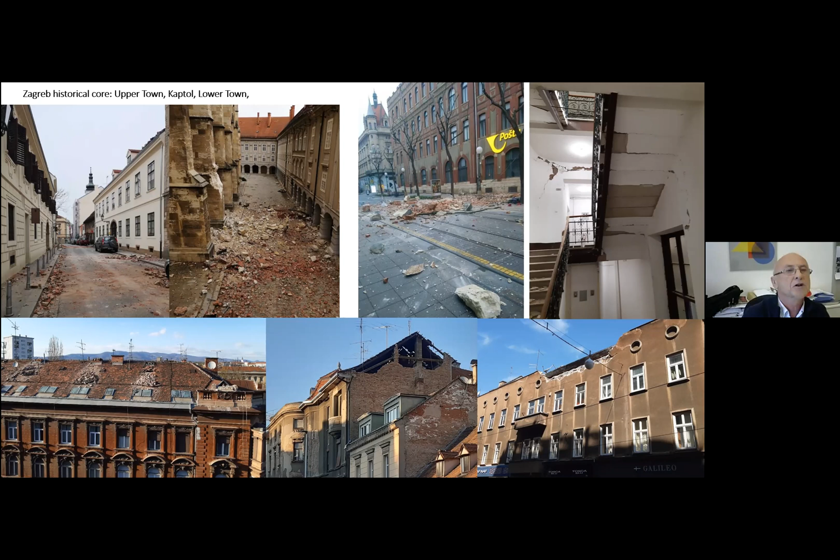I will be as short as possible since we have seen a lot of these scenes before. These are some pictures from Upper Town and downtown showing the main effects of the earthquakes. At first sight, the damage was obvious from broken chimneys, gable walls, and decoration on the facades, but detailed examination of the houses showed that the damage is much bigger inside.

The damage was greatest to the churches, which are special constructions with large spans and vaulted structures. Some kind of symbol of this earthquake was the collapse of the southern tower of Zagreb Cathedral.

Also, the Mirogoj Cemetery, one of the most representative Middle European cemeteries, was heavily hit by the earthquake, so it was named among the 7 most endangered cultural sites in Europe in 2021.

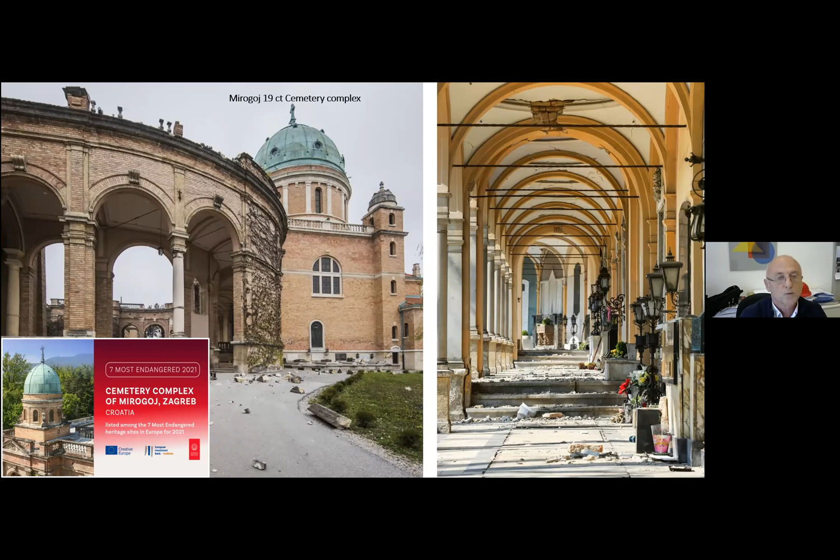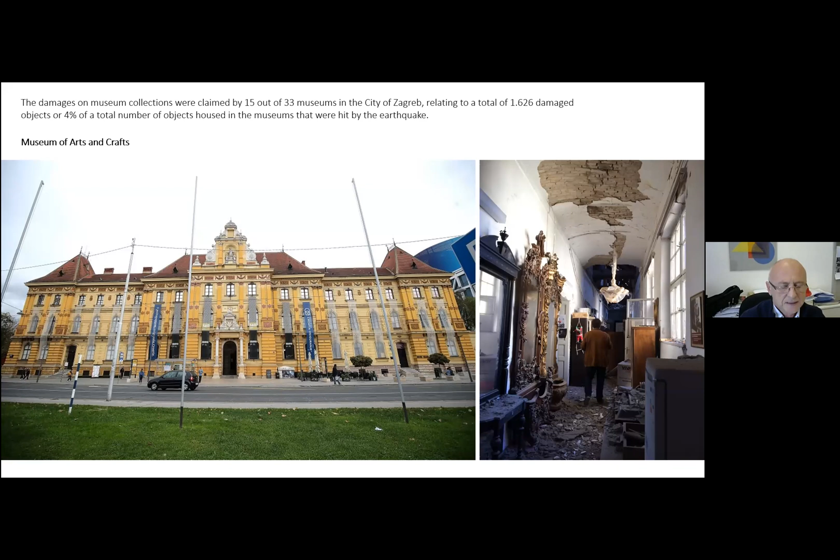We have 15 of 33 museums with damages to buildings and collections. On this slide we can see some interiors with delicate architectural equipment and stylish elements in the public buildings of Zagreb.

Now something about the Petrinja earthquake. In contrast to Zagreb, this earthquake was much stronger, and it hit the city core of Petrinja, where we have not only damaged buildings, but partial loss of the original structure of the buildings.

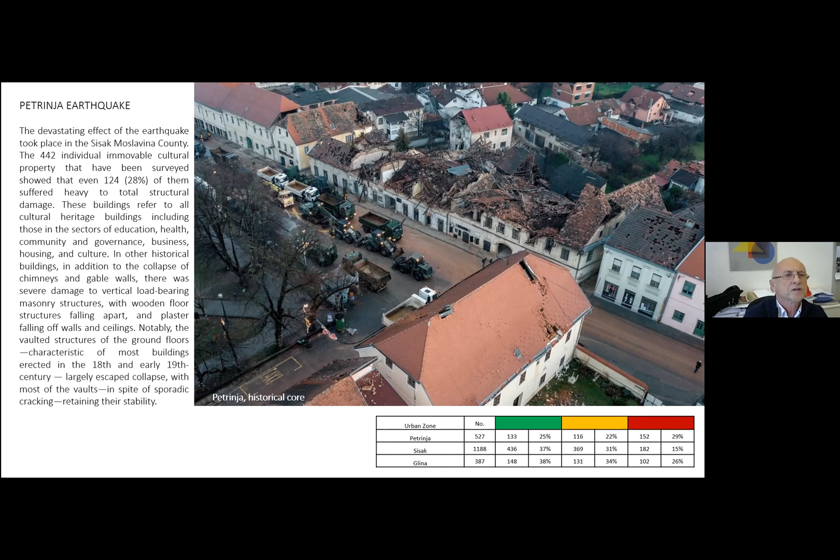The damage of the earthquake was widely spread throughout the whole county and also affected all neighboring counties, causing progressive damage also in Zagreb and the Zagreb region.

Of course, in the Sisak-Moslavina county, the biggest damages are recorded to the sacral buildings, where we have very heavy damage and also total collapse of constructions, especially bell towers, which in some examples fell into the church and broke the vaulted constructions.

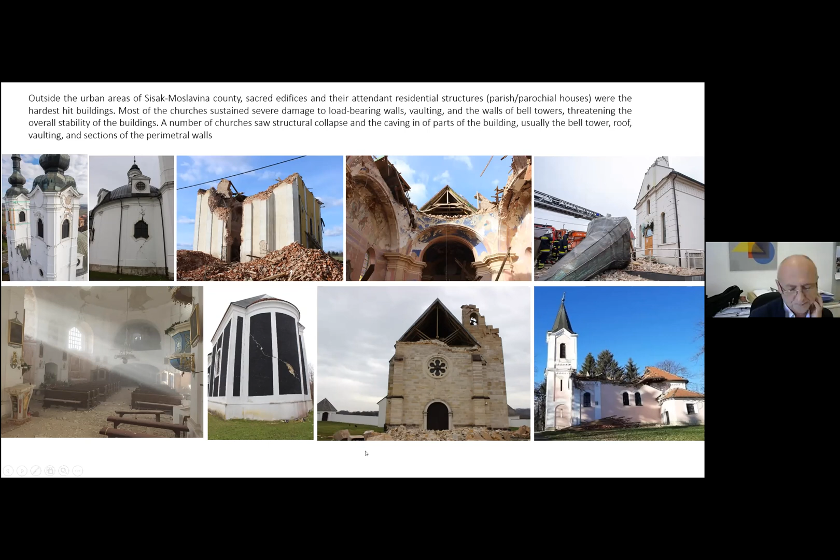We also have examples of collapsed gable walls and huge cracks in certain parts of the churches.

Now something about the post-earthquake response. Immediately after the earthquakes, both in Zagreb and in Petrinja, the Ministry of Culture organized conservation teams for damage assessment and continuous monitoring of the situation after subsequent earthquakes.

The teams were completed with colleagues from civil engineering and architecture who had experience with historical building constructions. This was a great help for us, at first, to make general observations and bring urgent decisions about the buildings.

One of the first actions was to publish instructions for the owners and contractors of buildings about the urgent measures they could make on buildings without permission of conservation departments. It was important to relax people in that critical moment, and we hope it helped. It helped at the first moment.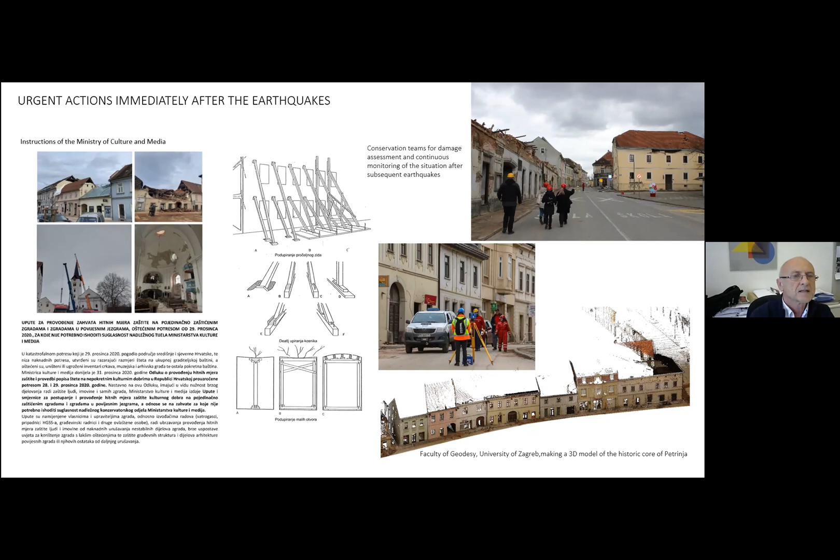Also, the Faculty of Geodesy of University of Zagreb carried out the 3D model of the historic core of Petrinja, as well as the most important buildings in Zagreb, just to document the actual state of the buildings after the earthquake.

We also immediately worked on the damage assessment. Here is an example of the assessment form, which had been created for the Zagreb earthquake, and of course it was in use for damage assessment on the individually protected listed buildings in the area of the Petrinja earthquake.

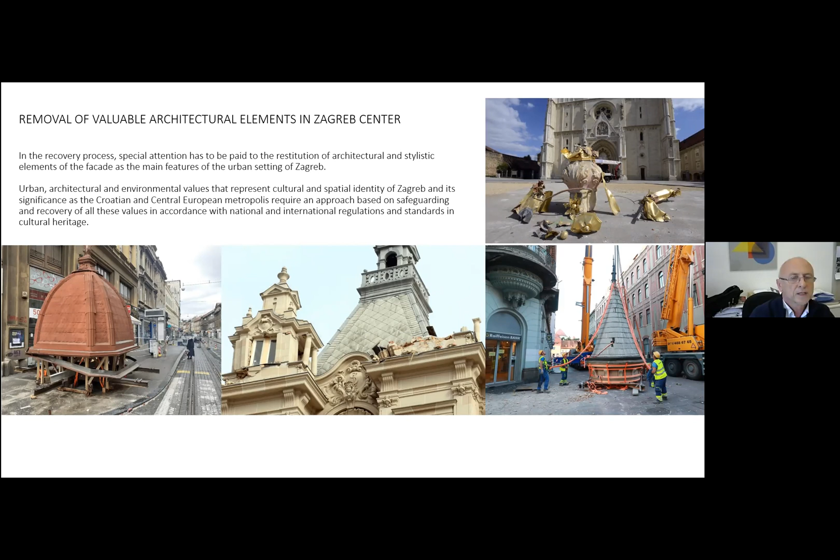It was very important in the first time after the earthquake to remove the unstable elements of architecture, which are at the same time elements of identity of the architecture of the Zagreb city core. So we have here some examples of removing the domes on the edge of the houses, decorations, and so on. It is very important to keep these elements for future restoration. Of course, security was the first and most important reason when we decided to remove these elements.

In the matter of Petrinja, as I said before, the problem was different because the buildings suffered loss of structure. The characteristic damage of several houses in the historic core was the collapsing of the roof construction, which provoked heavy damages on the upper floors.

So we had to make a very heavy decision for conservators to remove the unstable parts of the house, but before that we had to apply protective measures for the constructions we wanted to preserve. So we have an example of the technical solution of supporting the vaulted constructions on the ground floor and putting protective roofs on the preserved ground floors.

We also tried, as in Zagreb, to remove and store characteristic elements of the architectural equipment of the buildings. One of the proposals was to collect the old bricks from the buildings in order to make reconstruction easier later, because the old format of bricks could better fit the dimensions of the windows and other architectural elements. We managed to collect not a big amount of these bricks, but we hope it will be useful for reconstruction, concerning also the seismic reinforcement of the buildings.

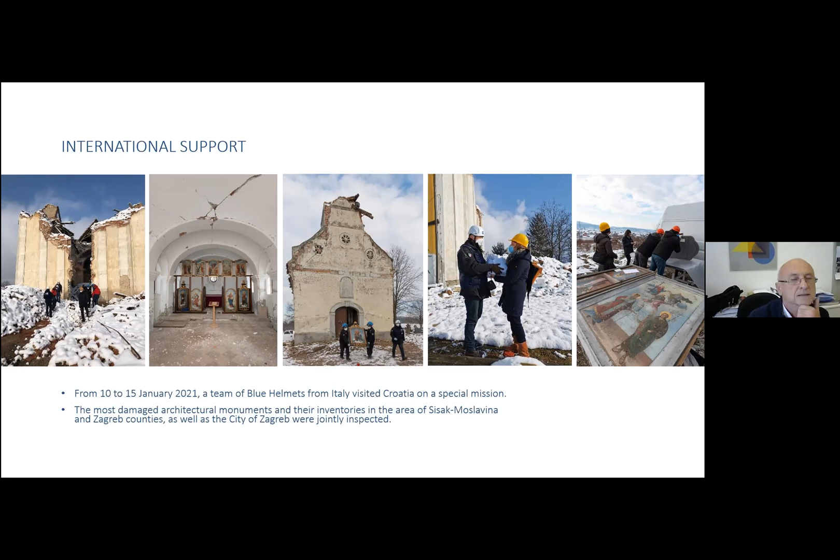The other important thing was that the Ministry of Culture, intending to have the best approach to the renewal and seismic reinforcement of the most important buildings, established the International Expert and Advisory Committee for the structural renovation of built heritage in the stricken areas of the Republic of Croatia. Of course, the main issues were analyzing the character of damage, the condition of structure and materials, safety and conservation approach, and the limits of acceptable changes for cultural property, which is always a very big problem.

Maybe briefly, I would repeat—we have heard this from Mrs. Zamolo and Mr. Atalić—but just a brief overview of the main features of the built heritage in this region affected by the earthquakes. We can group the heritage buildings affected by the earthquake into maybe three general groups according to the period and according to the characteristics of the constructions.

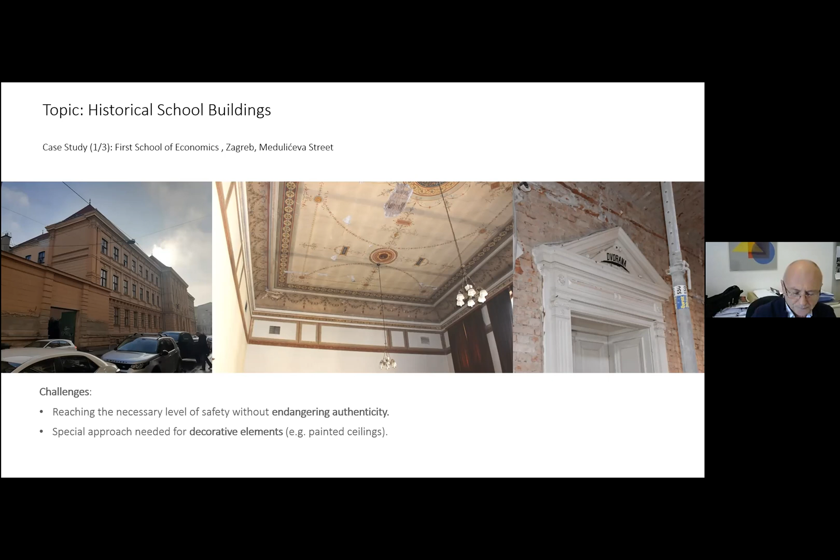The second topic was large span domes and vaults, mostly in churches and other representative buildings. The problem is how to preserve or enhance the constructions that carry artistic elements of architectural style. Here we can see the Church of St. Catherine in Zagreb.

With a very richly decorated Baroque interior. The second example is the Church of St. Mary Magdalene in Sela near Sisak, which was heavily hit by the earthquake in Petrinja. We can see the interior before the earthquake, and we have serious damage to the central dome of the church.

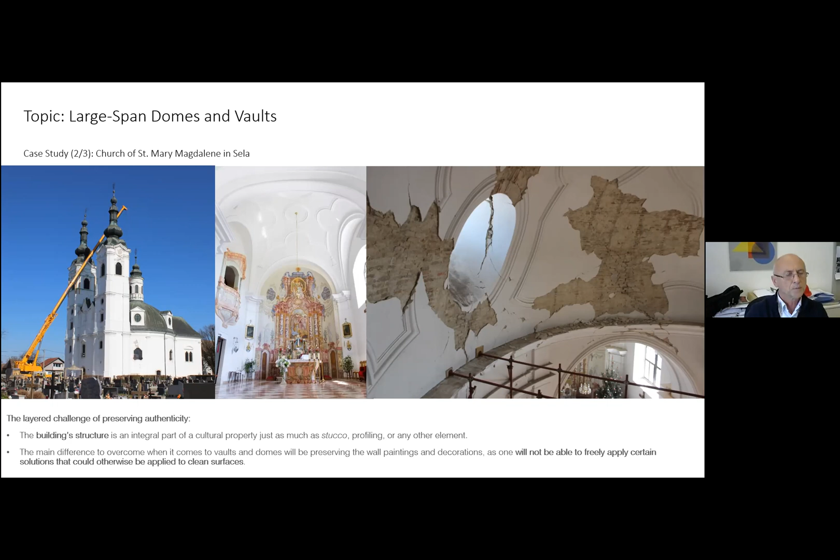Here we also have the problem of preserving the decorations on the intrados of the dome, and also the problem of reinforcement of the dome. But the project is going on, and we hope that we will find the best solution.

We believe that according to the values of Petrinja's city core, we must preserve as much as we can of these valuable historic structures of the architecture. In terms of that, we also made the assessment of the damages in Petrinja.

And we can see that the heaviest damages are in the center of Petrinja. We have 31 individually protected buildings in the city of Petrinja, and most of them are concentrated in the very center of the city. We have the majority of buildings in category 4 and category 5, according to EMS.

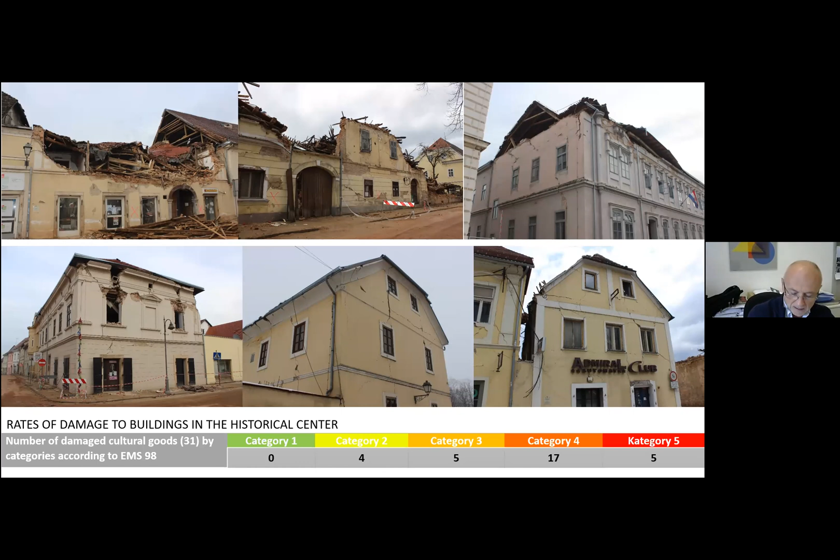Analyzing the damages to historic buildings, the damage can of course be caused by individual weak points of the building, but it is usually and mainly a cumulative effect of various factors. We can say this can be the original architectural features — some buildings have a better concept for earthquakes, some of them have not — the quality of construction, the materials used, the way of connecting the walls, the floor constructions, and so on, and the quality of mortars especially.

Then historical alterations to the building. We have a lot of examples where, during history, we had some adaptations which can be good or can be worse for the behavior of the whole construction.

Also, the previous harmful events. We know that Petrinja was exposed to an earthquake in 1909, where buildings were damaged, maybe a bit less than in this earthquake, but we don't know how the houses were refurbished or renewed. So we may have problems with this harmful damage.

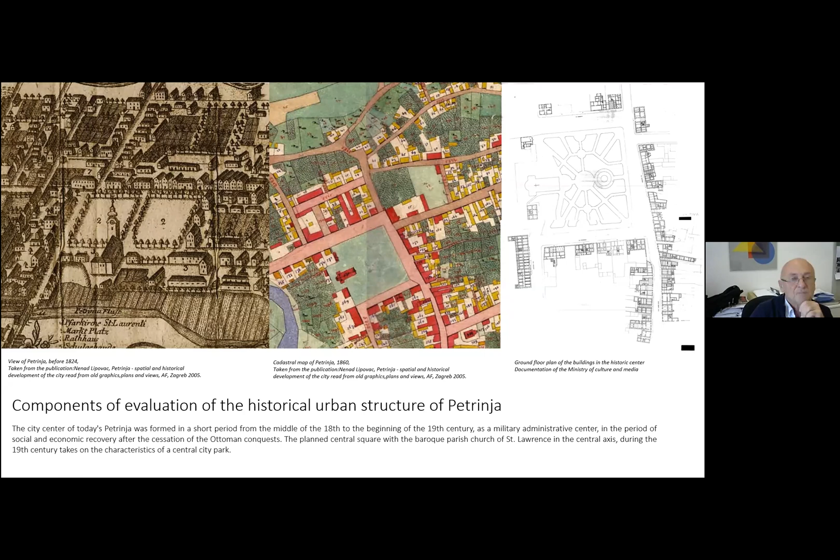Beside the urbanistic values, we have a lot of Baroque and Classicism houses with a very high range of architectural equipment.

Some Roman bricks from the Roman Siscia in the vicinity were used in the construction of some buildings.

Conservation starting points about the renewal of Petrinja include, of course, preserving the authenticity of the historic urban structure to the greatest possible extent. We are aware of the extent of the damage, but we hope that we can preserve some of these structures.

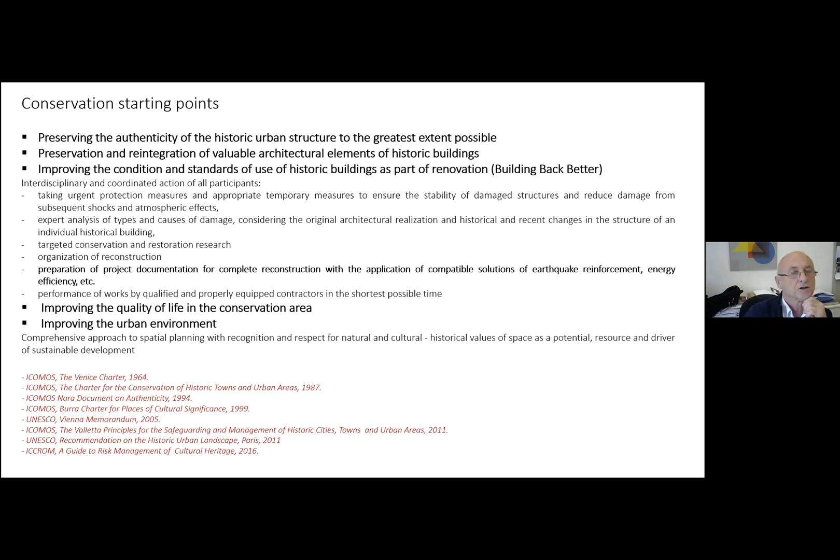So we rely on the major international charters and documents related to cultural heritage protection. We have some experience from previous disasters in Croatia, and here we have the words restoration, renovation, reconstruction, recovery.

Croatian experience is related to Vukovar, where we are aware that the character of war destruction damage is not the same as earthquake damage, but the intention is to identify the values and restore them at the level of urban identity and urban picture.

From Dubrovnik, we draw experience about anti-seismic reinforcement of houses, urban blocks and city cores. Of course, the situation is also different because here we have stone as material, and in our region we have bricks, but the methods can sometimes be the same.

One of the most important things concerning renovation is conservation, existing conservation and architectural documentation.

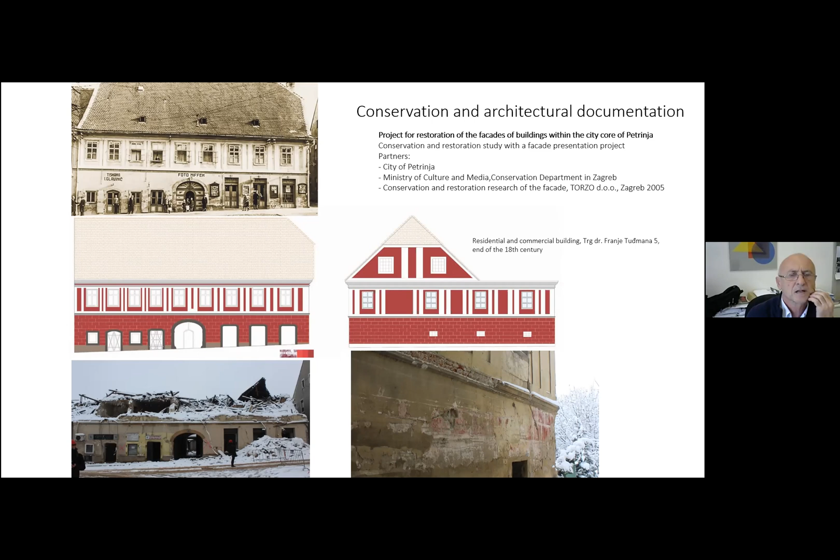We shall not have them in their original structure, but we hope that we can establish back the architecture of the house with seismic earthquake reinforcement, and reconstruct the features of the facade. Here is an example of a building from the late 18th century. We can see the details still preserved on the facade, colored details of the facade. Here are examples of other buildings in the project.

According to all these values and according to the state of the buildings and the earthquake damages, we propose several models for renovation of the houses in the city core of Petrinja. The criteria are building valorization, extent and type of damage, significance of the building in the urban landscape, and the possibility of establishing the purpose and use of the house.

Model A concerns the complete preservation of original structures, renovation of the existing buildings as a whole. It's related to buildings that have not collapsed, that are still preserved as a whole, regardless of the damages they have.

Model B is the partial preservation of original structures and reconstruction with reintegration of original structures. These two models concern preservation of the structure, but models C, C1, and D concern new buildings.

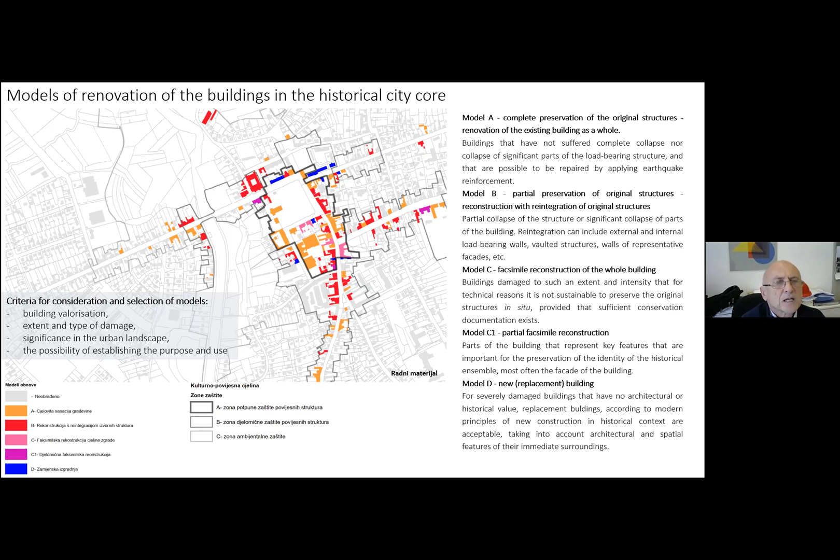Model D is a new replacement building. It concerns the buildings which have no values from a conservational point of view, the recent buildings which are heavily damaged in the earthquake.

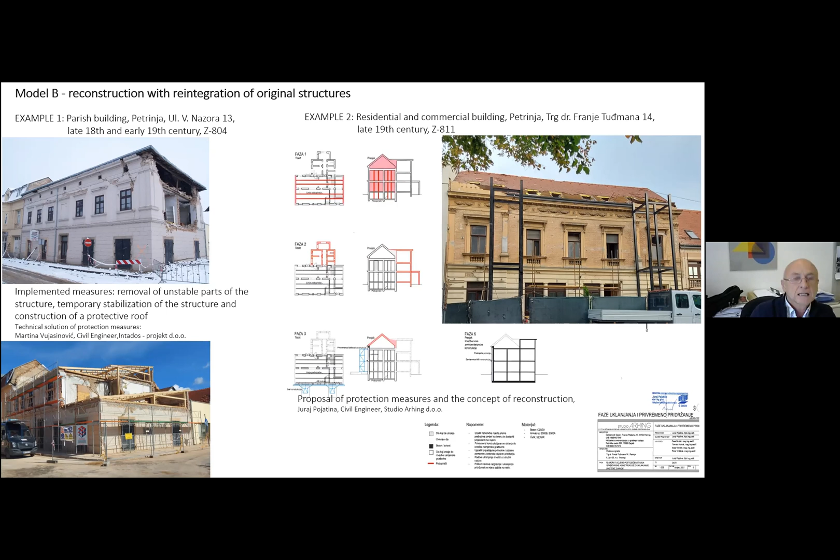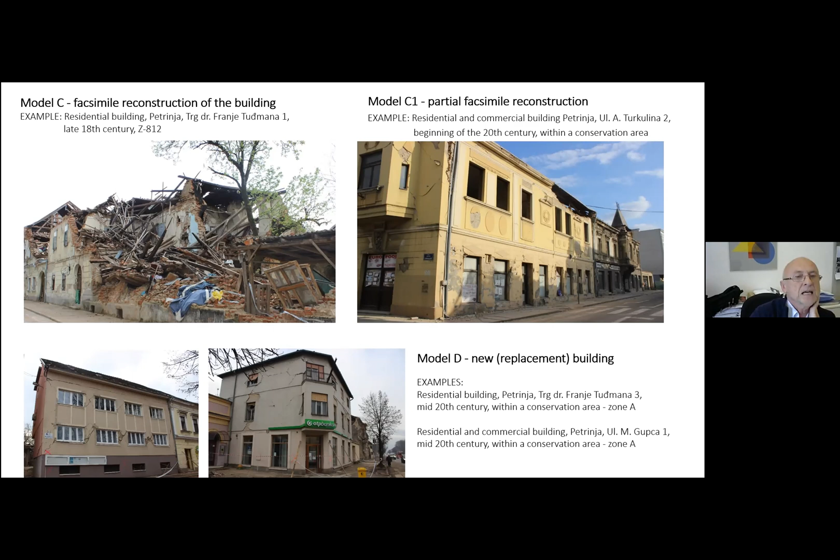But we also have several locations, which we've seen in Mr. Atalić's presentation, where there is huge and massive destruction. So we need some kind of urban transformation in these areas.